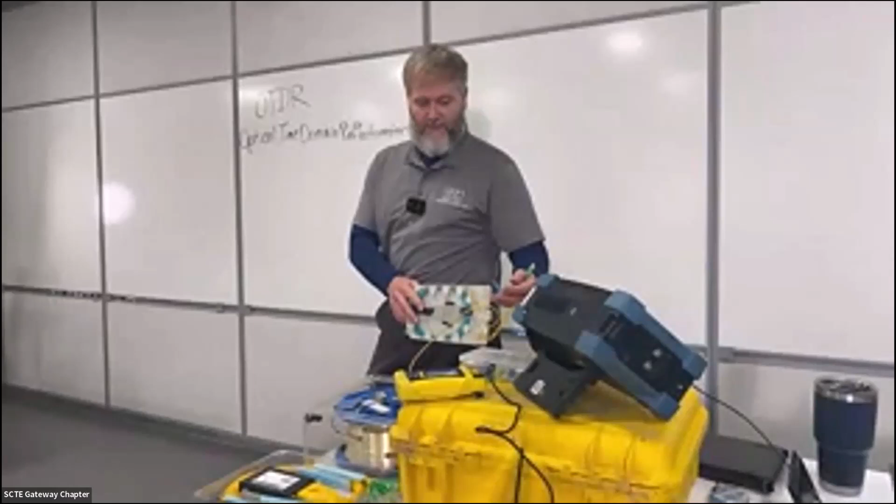Does it change the trace so it looks a little different to you and you're not able to analyze the anomalies on the fiber cable? We'll go through all of that. We're going to test through a bare fiber spool, about 7 kilometers of fiber. I'm using a homemade launch cable that I made myself. It has both APC ends and regular PC ends, so I can test multiple networks. We'll talk about why it's important to use a launch cable whenever testing networks.

On the way here, I was talking to some of my guys about some troubleshooting issues that they had in a hub. I will probably talk about what we deal with every day, which

Maybe, is that me? Oh, too. There you go. There's our first good one. That's it. Now we're through. All right. Broke that ice.

So anyways, I'm probably going to reach into my own toolbox of what we've been doing in Indiana. I'll give examples of some of the issues that we've experienced, and maybe you'll be able to relate: yeah, I've seen that, I've had that issue. We're going to talk about the basic level of the OTDR and try to understand what its purpose is. I'm not going to qualify myself any more than that. We'll just jump right into this material.

So for anyone that does not know, turn off your phones. I knew that was going to be me, and it was Bob. What about Bob? It's a good movie.

OTDR: a lot of guys don't even know what it stands for, how it works, or what it does. OTDR stands for Optical Time Domain Reflectometer. Most of you probably never knew that and really don't care. But what I do want to talk about is how it actually operates. It uses optical pulses of light. It averages the light that it sends out over time, and it's always checking reflection. That's its main job. OTDRs use what's known as back reflection, called backscattering.

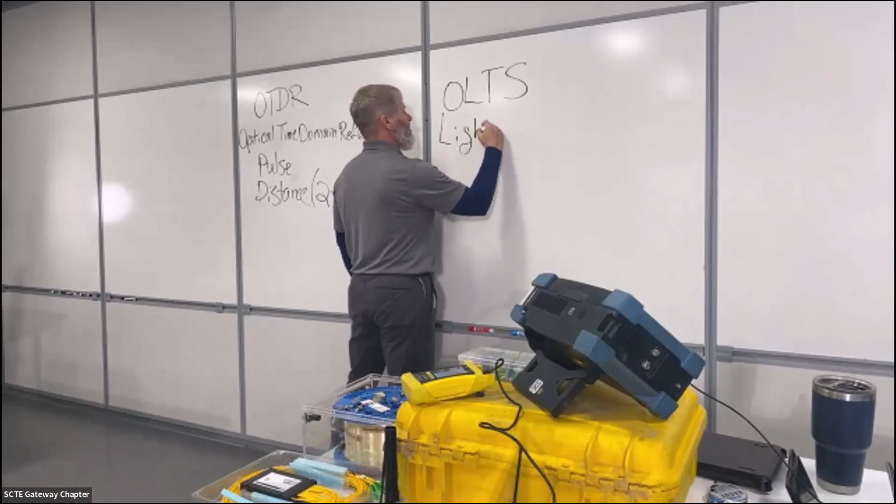Now, number one, if the OTDR only checks from one end of the cable, then it doesn't truly do what's known as an insertion loss test. So everyone that's on the live stream and everyone that's here in the room, a majority of you should know what an insertion loss test is. This is your optical loss test set. Do I get to go to the second board, did you say? Your OLTS. All right, your optical loss test set is your light source and your power meter.

Do you guys certify your networks by doing a bidirectional test from your central office down to your patch panels and your hubs? You should be, okay? When you go from the hub, which is known as the F2 side, the field side, you do the same test. You do an optical loss test set. That means that you have a source that is constantly sending a pulse of light down the fiber. You have a receiver that's receiving that signal. It is simulating how the user will operate when we plug them in to the equipment.

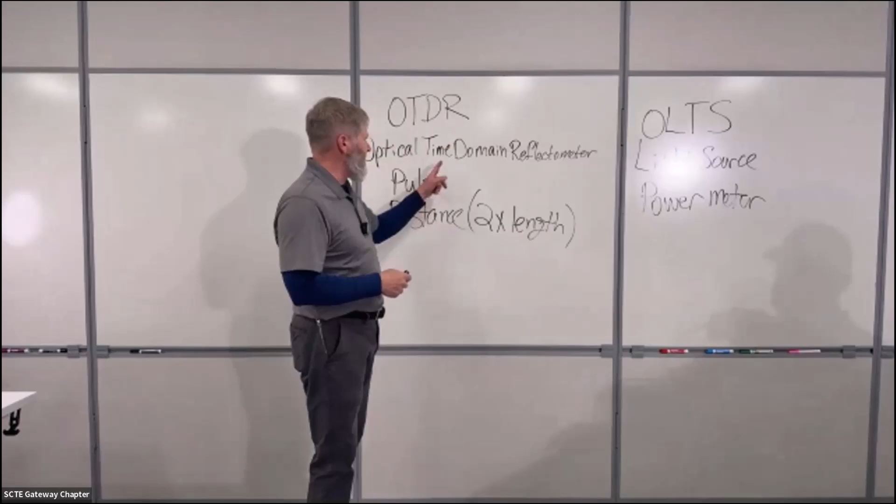The OTDR operates in a very different way. With the OTDR, it's single direction testing. As we said earlier, it operates like radar. It only shoots from one end of the cable. Therefore, there is nothing at the far end that's actually receiving any light. And here's why I like to stress this. You cannot use the OTDR to certify a network. There's a lot of companies that believe you can. And it's my opinion and FOA's opinion. I stick with policies and procedures, not really my opinion.

The use of the OTDR is to locate events, find a fault. It can tell me what's wrong with a splice. It's the only thing that can tell me individual splice losses. It can tell me back reflection. It can tell me how much reflection is happening across connections. It can tell me the length of the cable.

Now, I know a lot of guys will say, well, I have a machine. My OLTS tells me all of that and tells me the length of the cable. Well, that's great. But you just need to understand what the purpose of the OTDR is. So having said that, the way that we use the OTDR is basically just to try to find whatever our issues are on the cable.

Now, as we continue to go into doing the different settings changes, we'll also talk about how these work. They operate in different wavelengths. A lot of these units will do dual wavelengths because a lot of the systems that you operate in are going to operate in at least 2, maybe 3 separate wavelengths, what's known as wavelength division multiplexing.

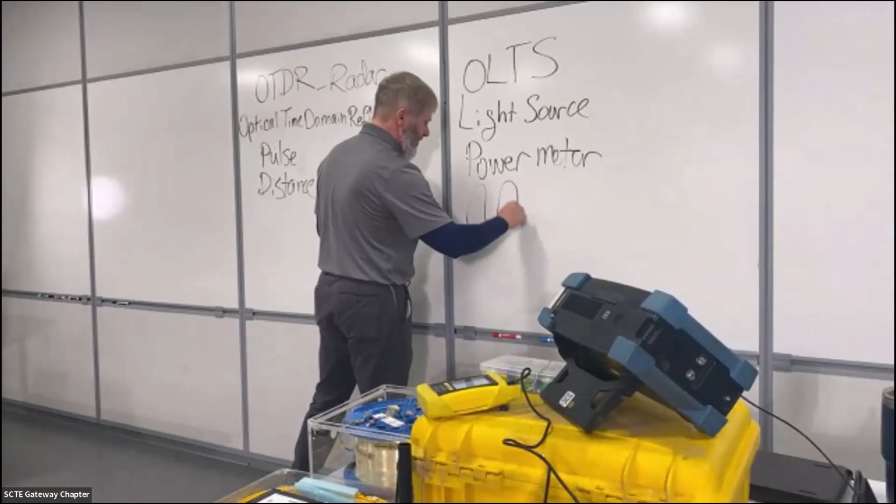It's the speed at which the light is traveling through material. Every wavelength is a different color. And it's very simple. Whenever we're referring to wavelength, we're literally talking about electric wave and magnetic wave traveling over distance in time. And so when they say wavelength, they're measuring the distance between those two waves. So let's say that's 1310.

Now, I don't want to go too deep into the weeds, but if you're going to measure it accurately, you've got to put it in a unit of measurement known as a nanometer. That's a billionth of a meter. That's how small the unit of measurement is for these wavelengths. So for most of our systems in here, we do multiple wavelengths. So you have to do wavelength testing as well.

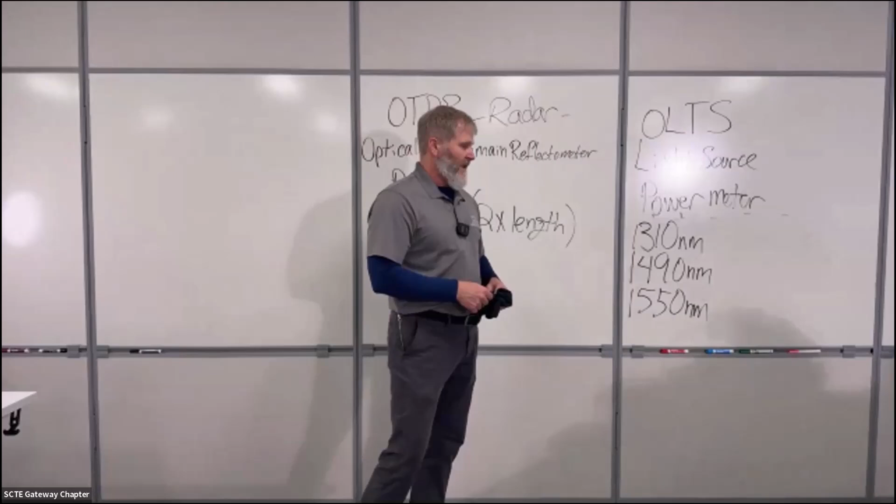1310 nanometers. You will see 1490 nanometers. You will see 1550 nanometers. And each one of those transmits different data simultaneously. Now, let me back up and say this. Why is it important to do bidirectional testing over your networks? Well, if you didn't know this, we use one single fiber to send multiple signals to each user passively.

This is a passive optical device. You guys work with PONs, passive optical networks. This device right here takes one single input.

Where can I display this? You want to come hold this for me there? My man. If you didn't know this, and once again, I'm just taking this very basic just so everyone is on the same page here. I got to hold this just right. This is pitiful. Listen, here's a plug for buying cheap equipment. You buy cheap Chinese stuff, you get what you pay for. If I'm in trouble for that, I apologize. There's got to be a disclaimer on the screen that says I don't know anything about it.

So this is a 1x32 splitter. The way that this works is it takes the individual signal. Are we able to see that light? Is that coming through at all? And it takes that signal and it splits it 32 ways through one single input. Are you seeing it? Is it blinking? Barely. It's coming on and off. All right. Thank you, brother.

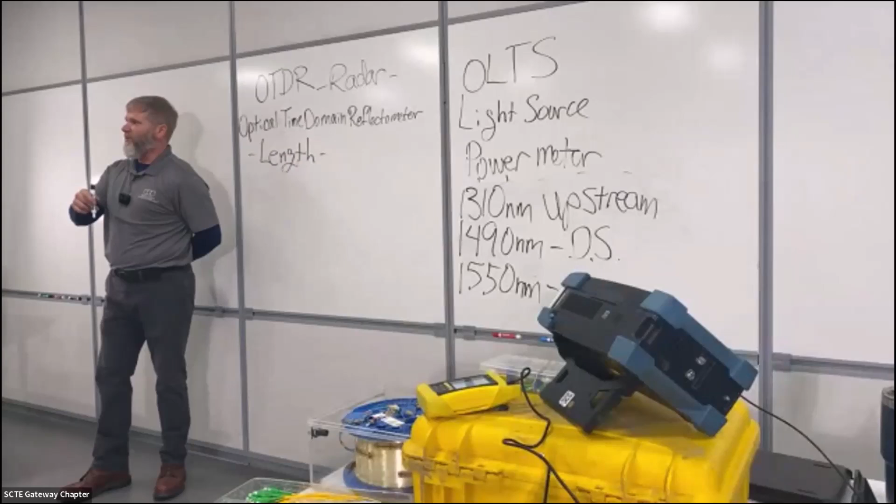So some of the main things that the OTDR does, besides changing the actual settings, what can it do? Well, number one, it can tell me the length of the cable. It can determine distance. When set with the proper settings, I can find out how long the cable actually is. I can determine where the break is. It can tell me actual splice loss. All right, and we'll actually see how you do splice loss here in a second. Determine actual individual splice losses. It can tell me back reflection.

My spelling is terrible, so please bear with me. It can actually do what's known as a fiber characterization. I'm probably going to spell this wrong.

That's wrong. Good. It's hard to spell in front of people. Try doing math in front of people. You're sitting here going, 1 plus 1... 1. So it's a joke. Come on, laugh. Come on, guys. Lighten up. You are not the one that's on the screen right now. Chill out.

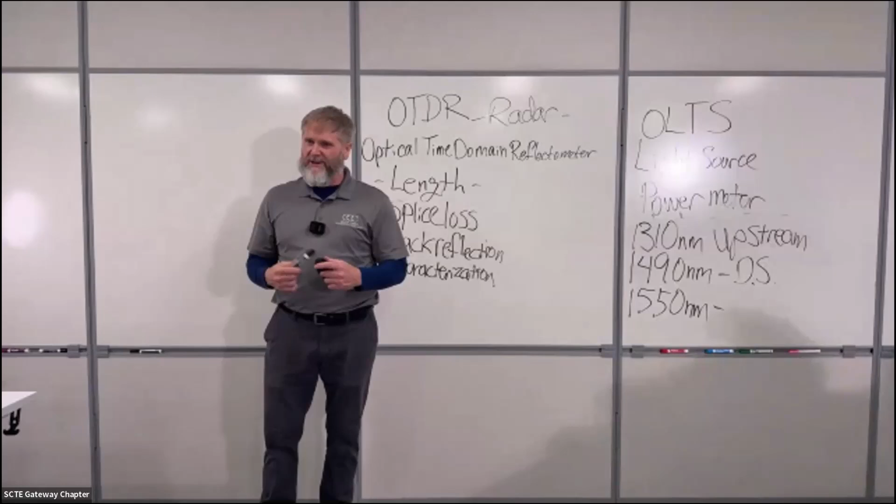The last thing that it can actually tell you is it's able to determine if there's any kind of dispersion on the cable. Now, I'm not going to get too deep into the weeds with that, but with single mode fiber, there's a couple of things that we do need to be worried about. Number one, we do have to worry about what's known as chromatic dispersion. The root word of chromatic is chromos. What does that mean? Color.

It just means that when you get a far enough distance away from your light source, the light slows in its speed. This is very simple. Just think about a parking lot. Last night, you were driving home from work, you were in the parking lot, you saw a light over in the corner of the parking lot, halogen light, whatever, LED bulb, and that light, as it slowly came to you, it changed in its speed, it changed in its color possibly, and by the time it got to you, it was less energy from where it started to where it got down to the end. So the same thing happens with light sources.

In some of the markets that I've worked in with Ervin in southern states, we actually reuse fiber over and over and over again. And we go up to 200,000 feet plus to get out to the rural area. So when we get out that far, the light might have a little bit of an issue just because it's dissipated. It's lost its energy over time. So it'll actually check for different types of dispersion. And then the last thing that the OTDR checks for is what's known as polarization mode dispersion.

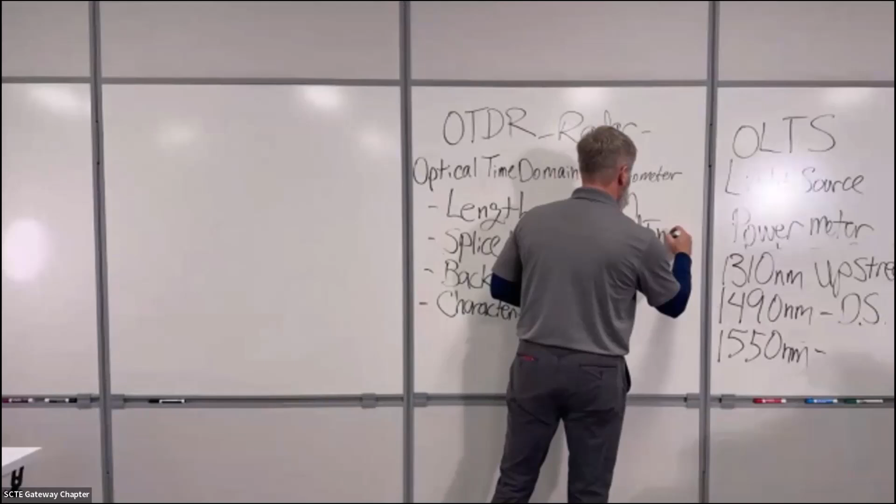So I always tell students that come through my class, I want you to be smarter than the average installer. One thing you need to know is single mode fiber is what's known as a stepped index fiber. That means it has one layer of cladding. And you guys should know this. If you don't know this yet, then I hate that for you. Whoever you're working with needs to explain these things to you so you know what you're dealing with. It's got one layer of cladding, one layer of core. Core is about 9 microns. It can be anywhere between 8 microns and 10 microns. Very small.

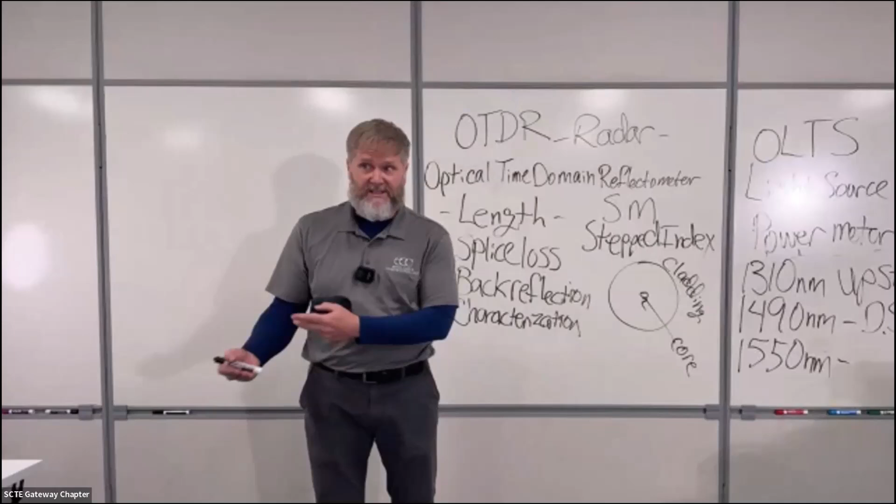Stepped index just means that there's only one layer of cladding and one layer of core, and the core is so small, so tiny, that the light only has one choice but to go straight. It goes in a straight line, hence the word single mode. Single mode fiber only carries one mode, so the light goes further. Imagine this. You can go up to 100 kilometers with single mode fiber before you actually have to amplify the signal.

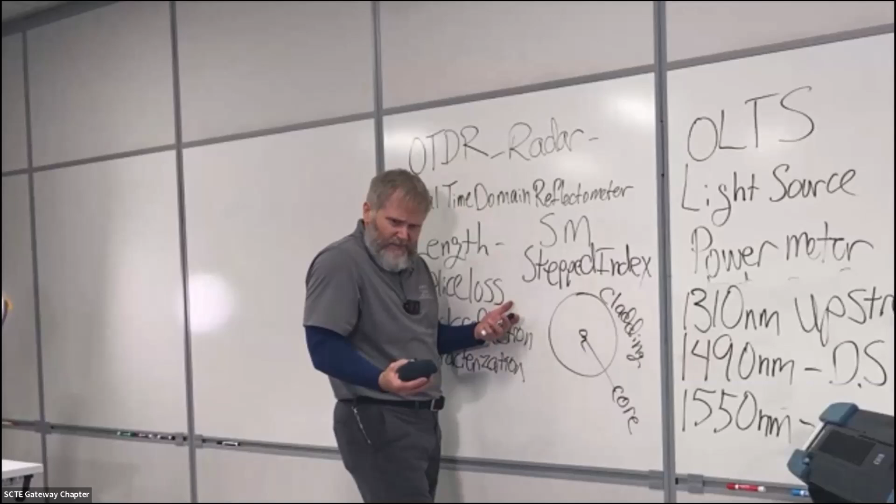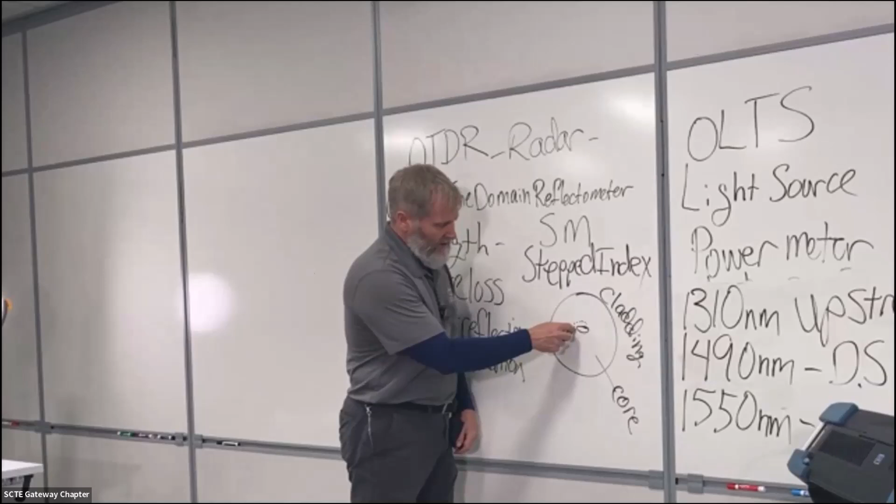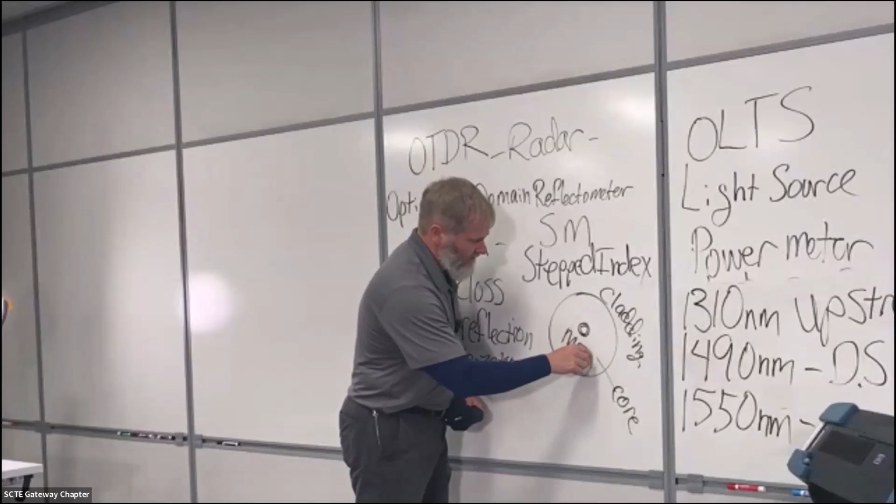So, it being a stepped index fiber, there's a couple of things that we need to worry about. And this will kind of blow your mind, but when fiber is produced, yes, the core needs to be absolutely perfect, but its concentricity may have changed. It may not always be a perfect sphere or circle. So the core may have changed. When the core does change, then it causes problems in the fiber. You'll see loss. So we actually have to worry about a little area all the way around the fiber known as the mode field diameter. So you've got your main core, and then you've got a little bit of area around the side. You have to worry about the mode field diameter.

So having said that, what's the reason that we worry about this? Well, the OTDR is the only piece of equipment that can test to prove if there's something wrong with that. That's when it gets into characterization. Now we're talking very long distances at this point. Now we're going 60 to 100 kilometers. We're traveling from city to city or whatever. So that's what is entailed in the characterization portion of the OTDR.

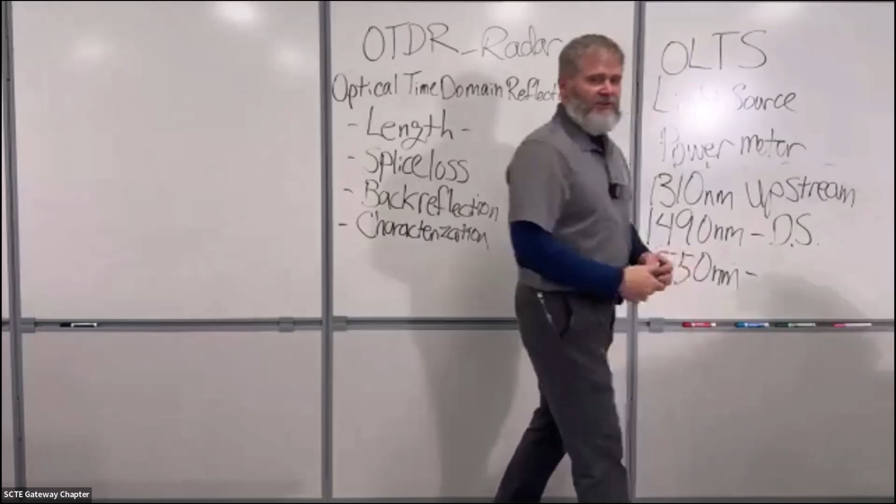Now, I started all of this to say the OTDR cannot certify a network, and a lot of people seem to believe that. It cannot do that. Its main objective, as I said, is to find the faults and the issues. So we're going to go ahead and jump in to see if we can find a couple of faults and issues here, and then go through and do a few settings changes.

All right, so my screen is being shared at this point. Good. Thank you, Jake. My driver, Captain, my captain.

I don't know. Probably, yeah, it'd just be easier. It's just rude of me to say, hey, do this. That's very rude.

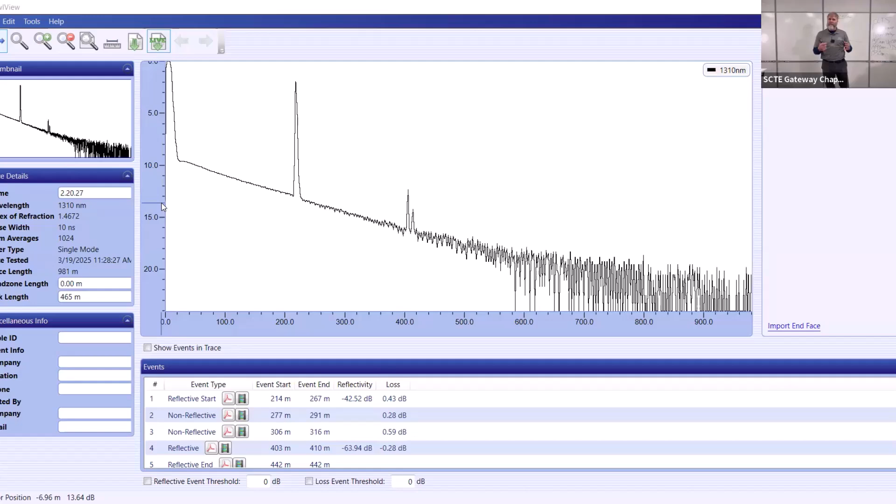Well, you worked in fiber long enough, you do not want to mess with live fiber, okay? You don't go in and open up a case in the central office unless you know what you're doing. And so they went in and were actually trying to check to see where the issues were. And one of the tools that we're able to use is we can go in and find the fiber pairs that we want to work with. We can put a little micro bend. We can determine if that's actually where the issue is. So it's a very handy tool. So we use live fiber mode quite often.

We'll go in and change the pulse width. We will leave the wavelength the same. I will change the number of averages, and then I will set the actual distance of the cable. And we'll see if we can see this whole network. Now, like I told you, this is 7 kilometers of fiber. It's 21,000 feet. So right now, am I really seeing a full 21,000 feet?

Well, let's just go straight to the trace. We're going to our sample trace here that we're looking at. And as you can see, we have whatever amount of loss we see on the left-hand side, and then we have our distance, and then we see a reflective peak at what, 210 or 207, 214. You see this? You see all these down here? You see these events? There's my reflective events. So there's a connection there.

It shows reflection. We're going to get into what's good and bad when it comes down to reflection. It's an interesting animal. With reflection, the higher the negative value, the less reflection.

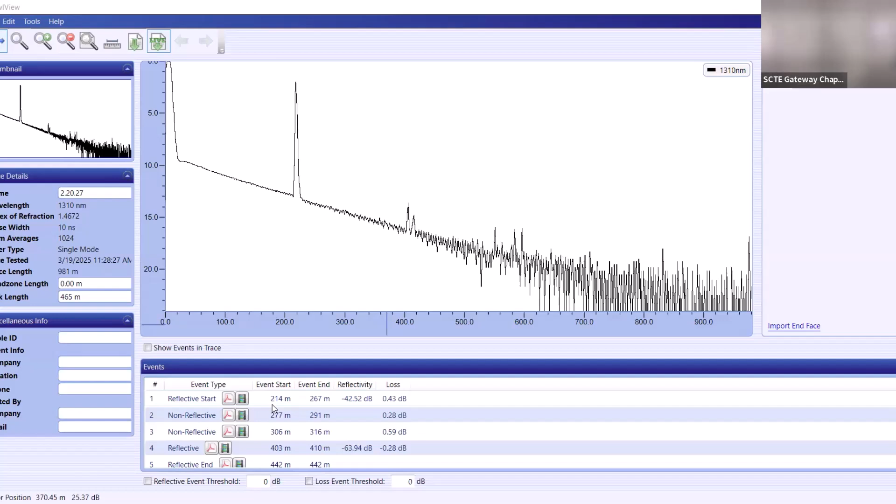The lower the negative value, the closer you get to 0, you have more reflection. So generally speaking, when we see reflection, we want to see a -40 or lower, which in your mind kind of throws you off because loss is inverse to that. So we want to see a reflective peak that is fairly low, and it is saying the reflectivity is -42.52, fairly decent. Says the loss is 0.43, fairly decent losses there.

Goes into a non-reflective section at 277, another non-reflective at 306. Shows a reflective peak at 400, and then says reflective end at 442. So are we seeing 21,000 feet? No, we are not. I'm going to have to change some settings. Now, I personally do this to kind of teach. I'm sorry that I'm going to have to stop this. We're going to restart it, but I'll have to go in and make the settings changes.

Now, what I'm going to do is run this in full auto. In full auto, you'll see what you guys would normally see when you're out in the field. So I'm going to have to stop this application. Actually, I'll just stop it here. In full auto, I'm going to have to do the trace, save the results, download it. It's the only issue here, so bear with me as we do this each time. And then we're going to talk about the different components.

Now, are you guys using launch cables? Good answer. What is the minimum length of launch cable that you're using? 1,600 feet? Very good. So, in theory, you need around 700 to 1,000 feet for the pulse of light to actually go through a section of fiber and calm down. A launch cable is known as a pulse suppressor.

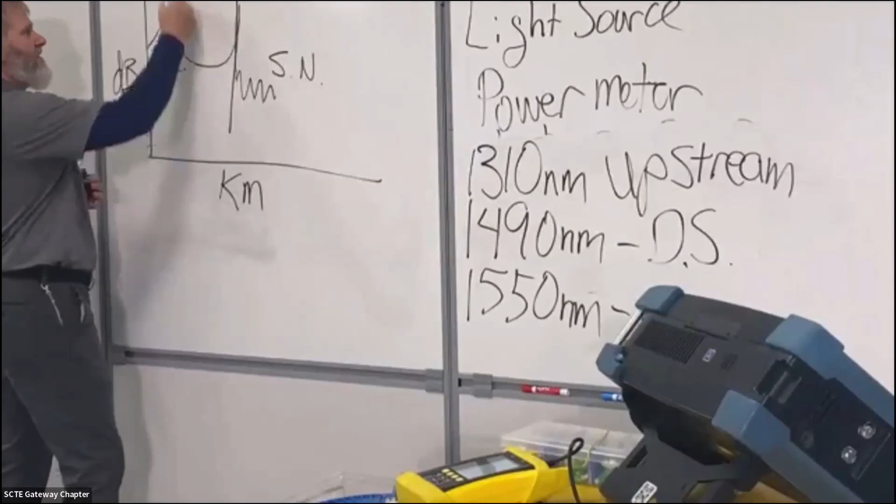But if we're trying to check the length of our launch cable, it'd go down and then you'd see another reflective peak and then it would drop off into what we call software noise world. If you want to measure the length of your launch cable, you put a cursor on one side, another cursor over here, and you get a distance between these two. Then you can plug that into your OTDR.

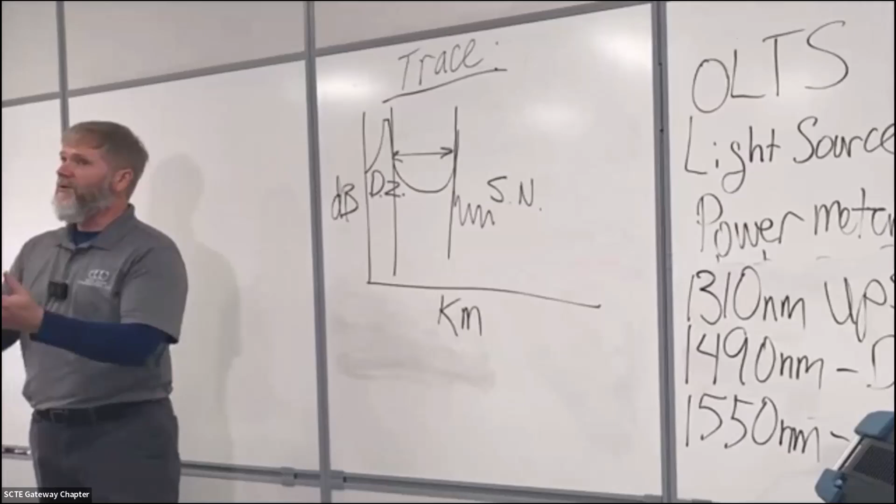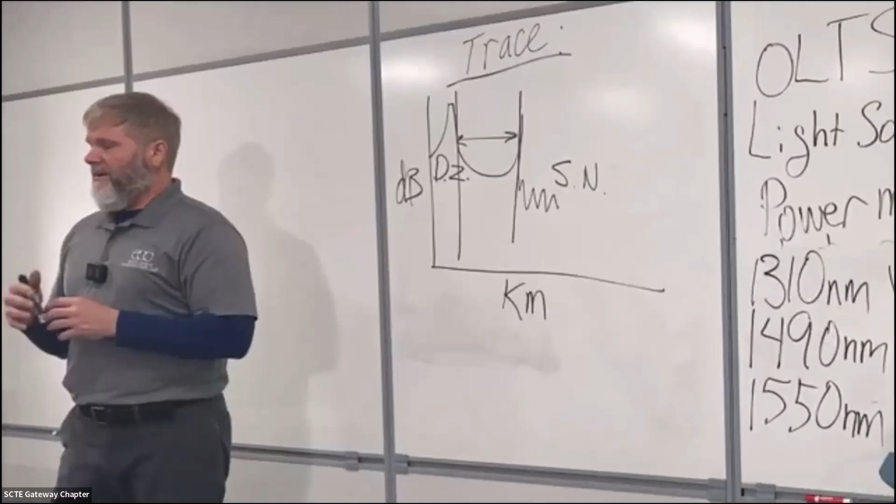Other OTDRs will allow you to make a settings change that says not disconnect, but discount, or it bypasses. It looks at the first connection and says, don't even worry about the first connection, check the next connection. So the next connection will be your next connection in from the launch, because here's my first connector, then I have my second connector. Make sense? So it's very important to set your OTDR launch cable length properly, so that you can determine what your network is.

Now, the next thing that's important about the launch cable, be honest, who uses a receive cable? It's just a glorified launch cable. Do you put a launch cable on the far end? How do you know the loss at the far end? What is that?

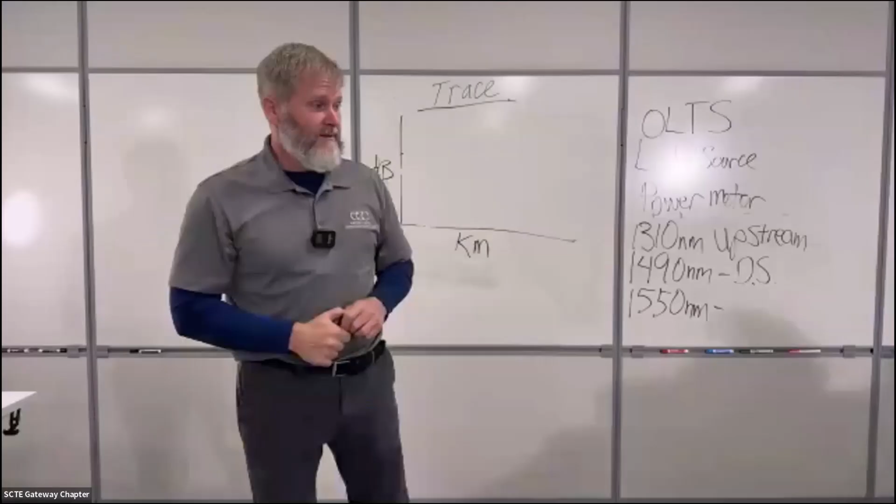Do you put a receive cable on? No, you do not. How do you know the far end connection? How do you know the loss across the far end connection? How can you? When the light gets to the far end connection, it has to go into another connector for you to actually see the loss. So if you don't put on a receive cable, you really don't know the far end connection's losses. Does that make sense? Are you tracking with me?

Now, here's another reason why it's nice to use a known launch and receive cable. You ever get into when you're testing networks and you're having some major issues trying to find out the actual length of your segment? Well, wouldn't it be nice to have a known good distance at the front and at the end? And then all you got to do is just subtract those two distances and you know everything in between is the actual cable. Why is that important when I'm trying to find a break?

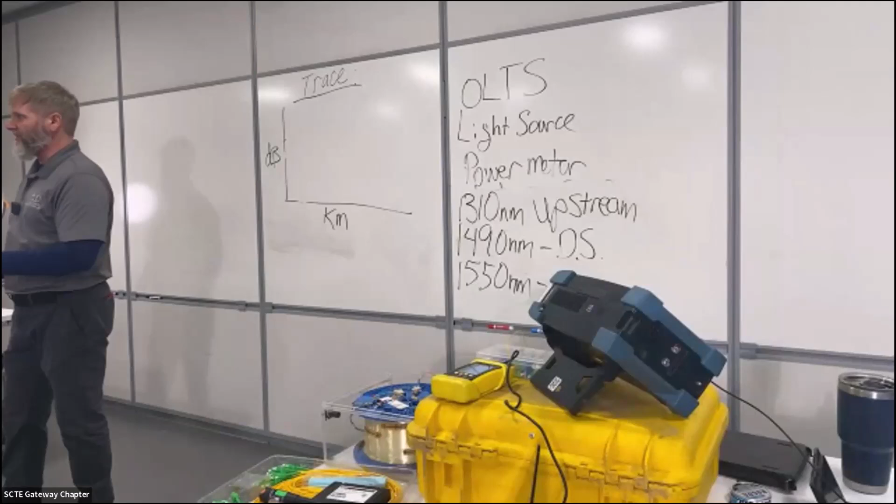Now, I always go back into my own toolbox. We've had quite a few fiber breaks, what we call backhoe fade. All right, we've had guys set anchors. You ever had anybody set an anchor? Do a down guy, punch right through your pipe, screw your fiber right to the ground. You ever had that happen? I mean, surely you have. It's happened to me. It's happened to you.

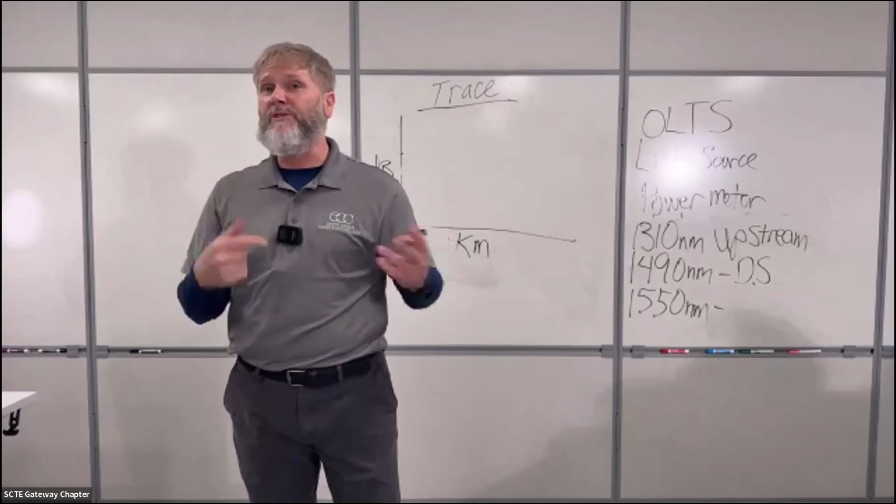All right. We had that happen on a 288 fiber in a city in Indiana, and we're trying to find out where the issue is. So instead of using a launch and a receive cable, what we did at that point in time is we used two OTDRs. I went from one end and shot the far end back toward the hub. My technician went to the hub and shot from the head end back toward the far end. We were able to get a general location of where the break was. And lo and behold, doing that technique, we walked right out there and looked at the pole and saw a brand new down guy.

And do you think they told us they did it? No. Do you know what they did? Can I tell you a secret? Don't tell anybody. So they dug a hole and they used a sawzall and they cut off the top of the anchor, the rod. This is how smart these guys were. They just left that in the hole and the sawzall blade. And then they just moved over and set another anchor right next to it. And when we asked them, do you guys know anything about it? No. Yeah.

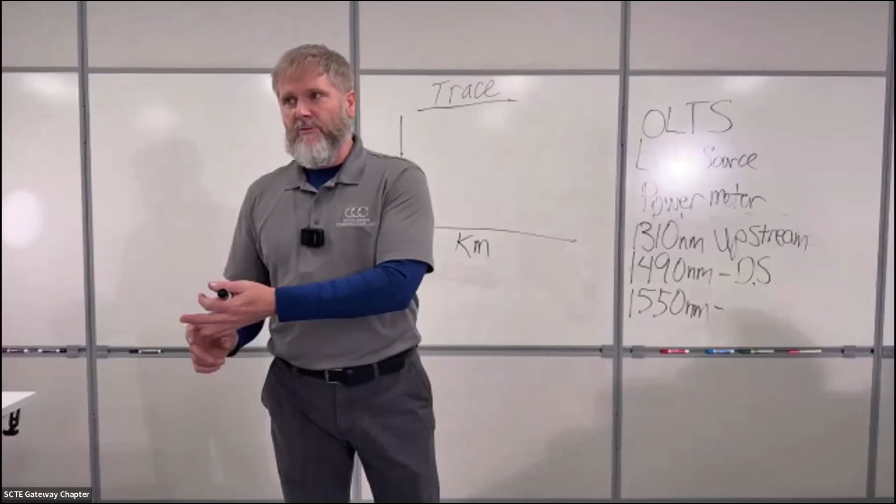So, main objective and reason for this story: if you have a known good launch cable length and a known good receive cable length, it helps you to determine the problems a lot faster. All right. If you can't do that, then you obviously use two machines, shoot from both ends, whatever. So we're going to go through and check all of that.

How? Uh-oh, am I still doing something wrong? You're driving. Drive for me, brother. So, how do you actually analyze a trace? Go ahead. I'm waiting on you. Oh, I see what I got to do there.

Thank you. How do you analyze a trace? Right? You shot light across the fiber, trying to determine the length, trying to determine your problems. You're trying to find out where your issues are. What do you do? Use cursors, right? Markers. Left, right, 1, 2, A, B. In my world, mine are red and green. I am able to determine distance and loss just by moving these cursors.

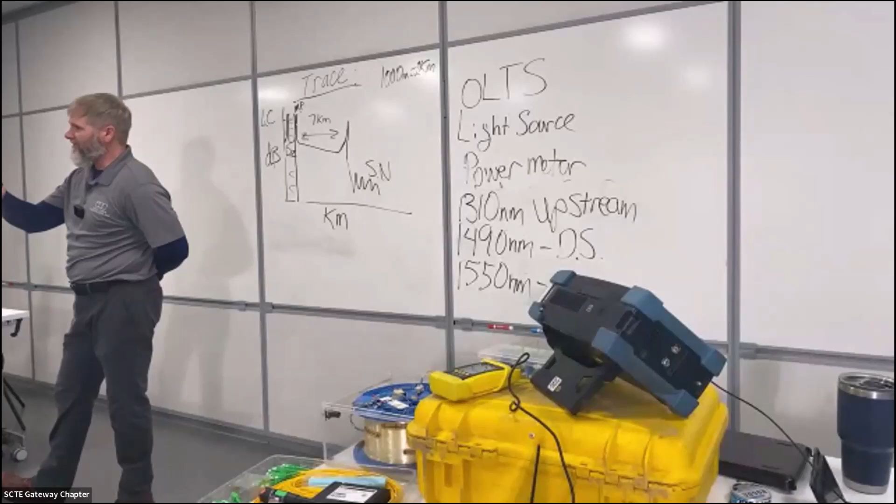I haven't seen a hub yet that was over 15,000 feet or so from a central office. Most of our feeders are fairly short, 20,000 at the most. I don't know what yours are. But if you have negative light at your hub, then you're already going to affect the input to that splitter, which is going to give you less light to the splitter.

Okay? Go to the example that I saw this summer. We were sending a positive value of light from the central office. It was leaving out of the central office about a +3. By the time it got all the way down to the far end and we plugged into the actual feed fibers from the F1 side, we were like at a -5 or something.

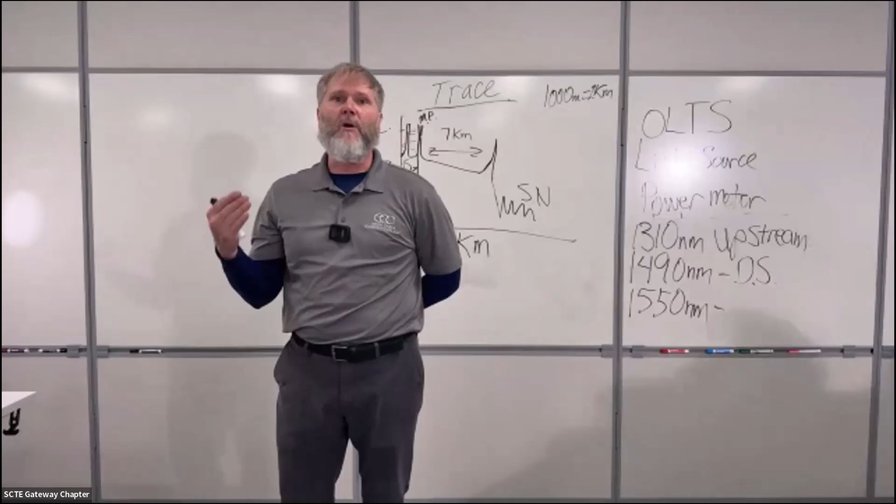Now, the 1x32 splitters, and all this information, everything that I'm telling you, all comes from a standard. There's a certain standard, TIA 568, C.3, there's a D.0. There's a lot of different standards out there. When I mean a lot of different standards, I mean a lot of different drafts or versions of standards, but most of the numbers, they're basically all the same.

And when you go through this 32 splitter, you generally lose anywhere between 10 to 15 dB of loss. So if you already started at a negative value, then you're going into a splitter that's already going to be negative, then it gives you less light to your customer. The hub we were testing started at a negative value.

Once it got all the way out to the customer, we were down past a negative 21, 22 at the house. There was not enough light for the actual photodiode on the network interface device on the house there to actually light up the house. What was the problem? We determined the issue ended up being that we had dirty connectors in the field.

Now, who scopes these connectors? Who takes an actual scope and looks at them? Raise your hand. Anybody do that? I do. I do. Anybody in here do? Probably not.

It's okay. I'm not trying to call you out. Are they going to get in trouble for this? They're getting in trouble. Yeah. Boom. I need you to sign a document later that you test all this information. Legal affidavit.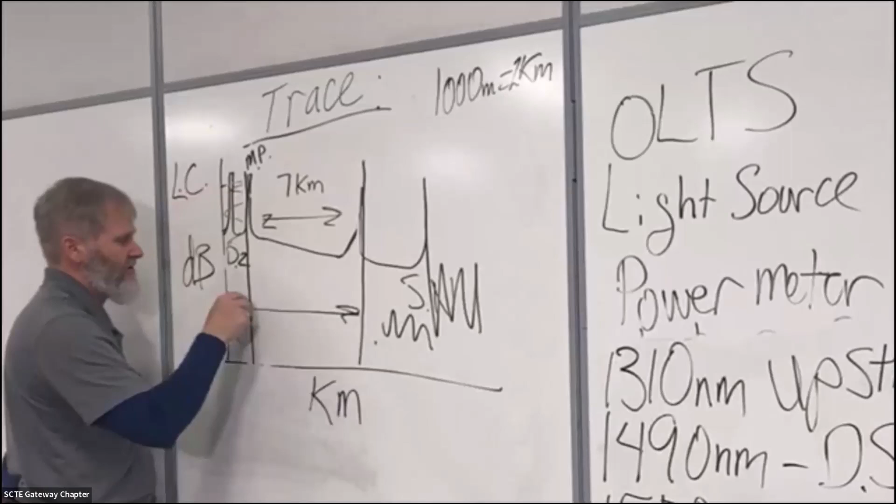It's very important. All right, because at the end of the day, if we don't get enough light to the customer, then obviously we're not doing any good. Now, for today, I'm going to be able to connect this to a receive cable, and then we'll do a shot across this again. And we're going to prove this and see that process. Now a little homemade number here.

All right, we're going to go one more time. So we're going to go in. I'm once again not changing any settings yet. I'm going to change the settings here in a minute. But for now, I just want to show you running this in full auto.

Am I still sharing at this point, or do I have to go back? Okay, that's cool. I think I understand now. Okay, and then what do I do? Share screen. Got it. Okay, and I am sharing. Very good. Okay.

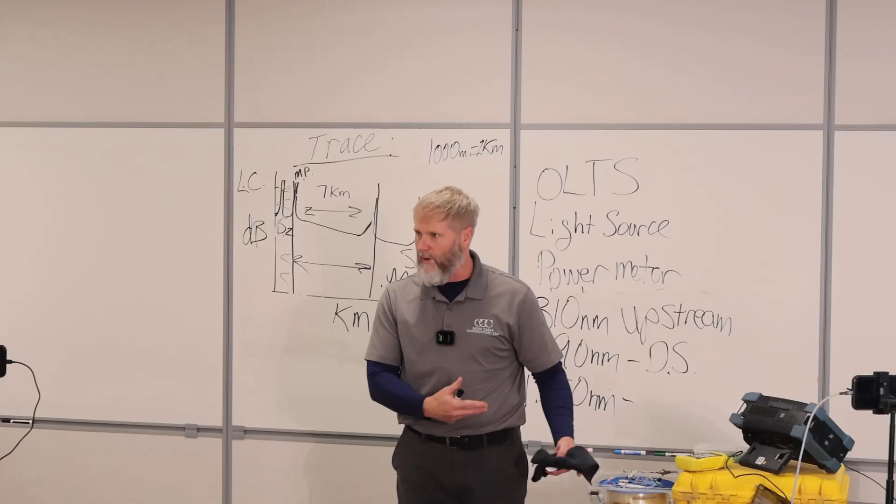All right, so let's get back into this. Now, when we just finished, I was going to show you with the OTDR, we were going to look at how the trace looked different when I put on a receive cable. I have just put on a receive cable. Are we seeing this? We're good, sharing? I can't see past the last connector. I'm not going to sit here and waste your time to try to describe why I can't see past this. I don't really know right now, okay? And now is not the time to try to troubleshoot this right in front of me.

But having said that, what we would have expected to have seen, let's close that door if you don't mind. I don't want to see anybody.

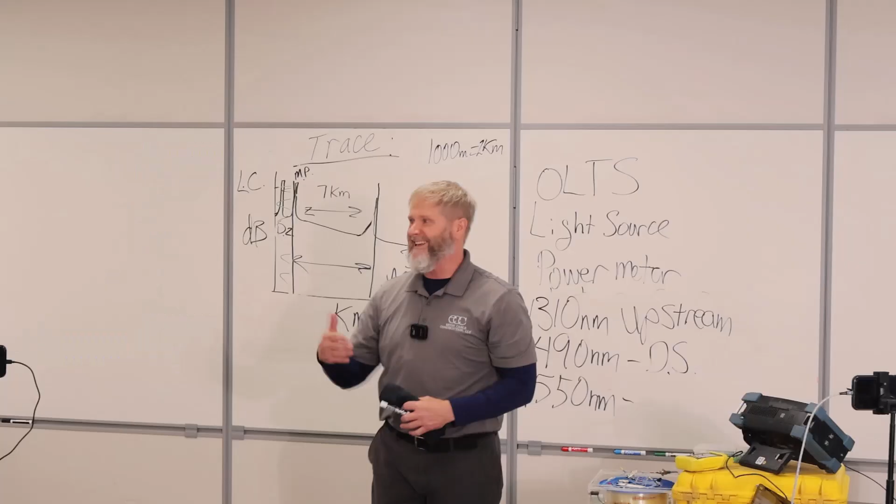Having said that, what I would have expected to have seen here is another blip like this very first connection here. And I would have seen another one down there, and it would give me a little bit of distance to get out of that last connector to go into another piece of fiber so I could check the far end connector. Now I'm telling you guys procedures. I'm not telling you this is my opinion or what I feel like you should do. This is just what should be done if you really want to know the far end connector.

Now, I will also have guys who'll ask me this next question. They'll say, well, all right, we're never going to go out and put on a receive cable. We're all from the world of production. Let's just be honest. Okay. The job is to light up the hub. We want the customers on as quickly as possible. If the connections aren't bad on the far end, do we really need to worry about it? No, I guess you don't. Okay. You can wait until there's actually a problem and then address the problem then.

I'm not going to say that it's accepted practice, but it is kind of how it works, because generally speaking, when you guys go out and you're using nodes, nodes go to a hub, right? I don't know your network, but right. So generally speaking, these hubs are all pre-made at the factory. So when you get them, they should have already been checked, QC'd. So all the caps should be on them. So in theory, there should be no dirt or dust on them.

So one thing that I was really a stickler for and came very close to wanting to just fire people was if I went to a cabinet that you just tested and you pulled all the blanks out so you could test, because it was just easier to pull them all out and test, and you left them out, and I found that cabinet with open connections, I wanted to visit with you privately.

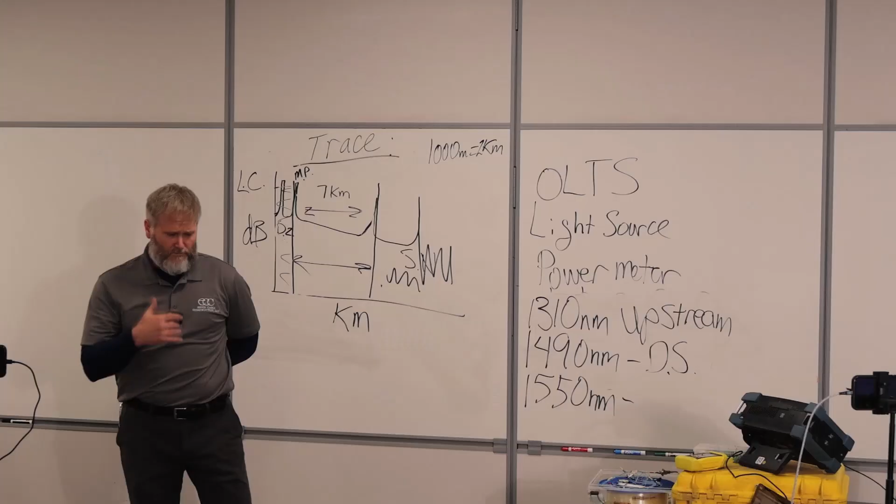So that's it. Now that we've actually done a full auto trace, we see what the trace looks like. Let's talk a little bit about theory and how light works. Light traveling through fiber is compared to light inside a vacuum. What's a vacuum? Space. Light traveling in space travels about 300,000 kilometers per second, or about 186,000 miles per second.

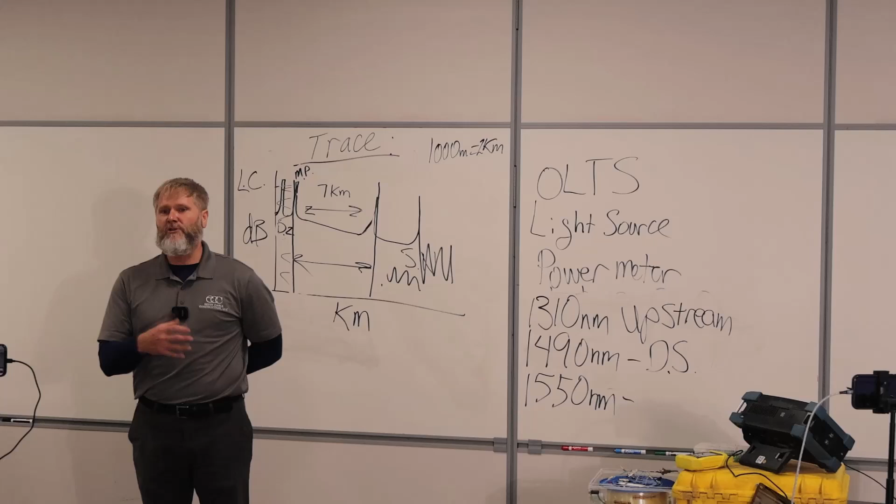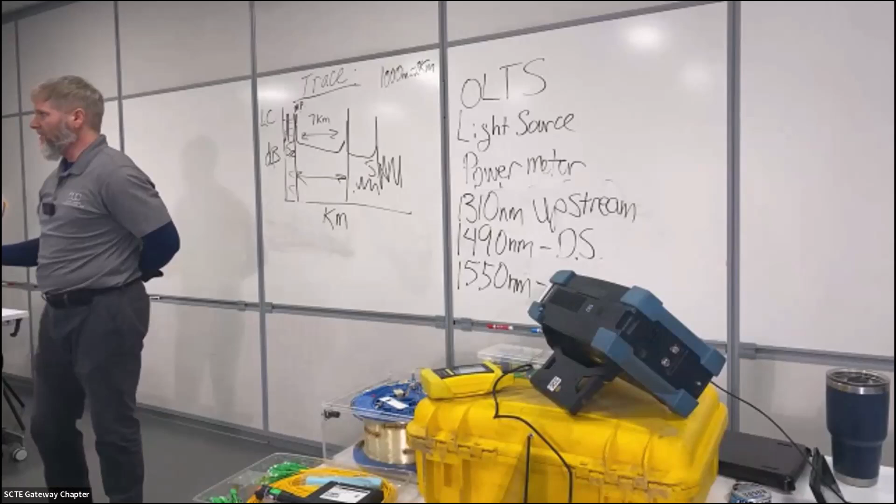Now, light in fiber travels at about 2/3 of that speed, so about 200,000 kilometers per second. That's why whenever we send light on this side of the earth, it gets to the opposite side of the earth just that quick. So when we're testing our fiber networks, we're always testing a really short distance. This is another reason why you need a launch cable, because you'll never see the very first events on your network. It's impossible.

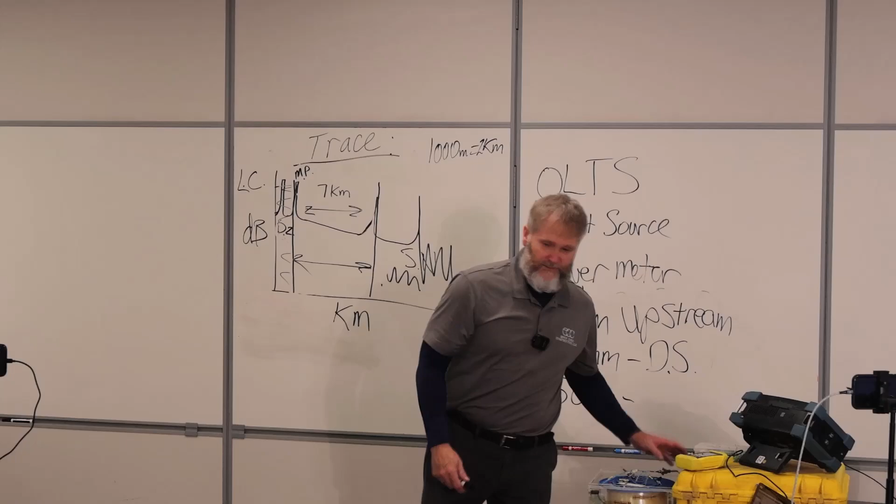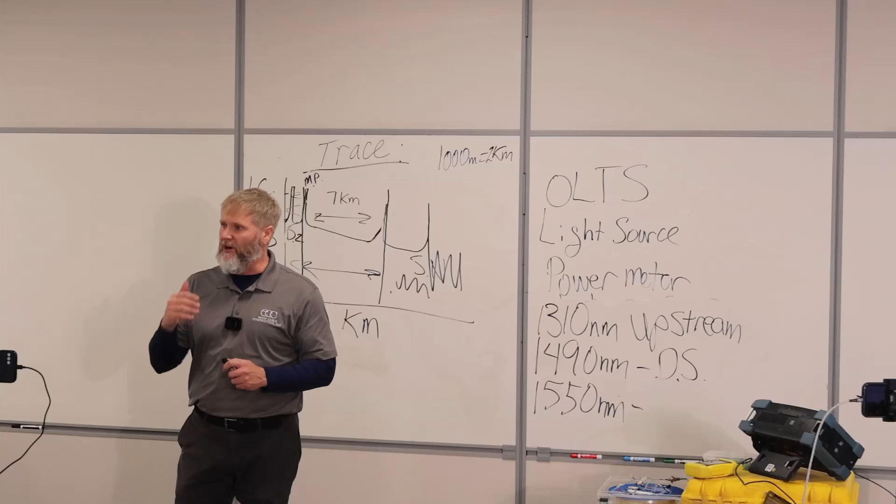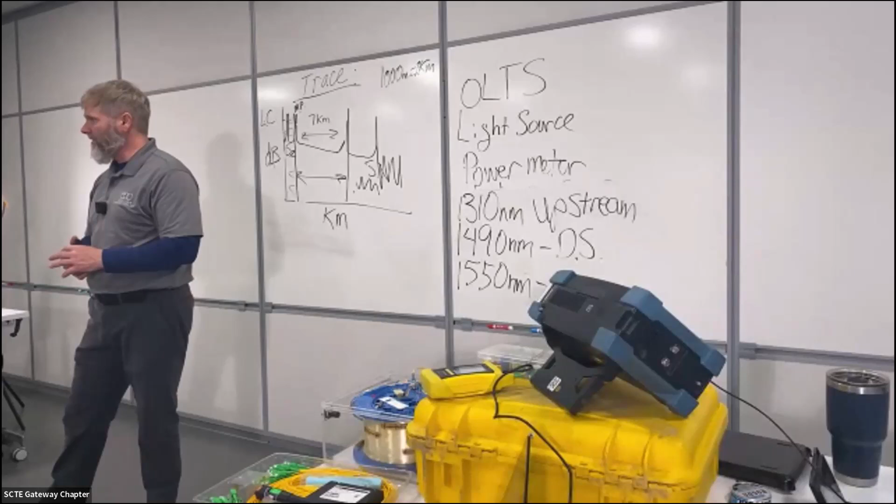Now, this brings me to what I tell guys when they're testing in the central offices at the head end. Going back to the example I had this week, if you're trying to prove that there is loss within 1,000 feet of the machine, you've got to use the launch cable. They had a loss at about 140 feet. They didn't use a launch cable like I told them, so their trick was they went to the far end, shot it backwards and found out it was inside the CO. But no matter what, don't forget your launch cable.

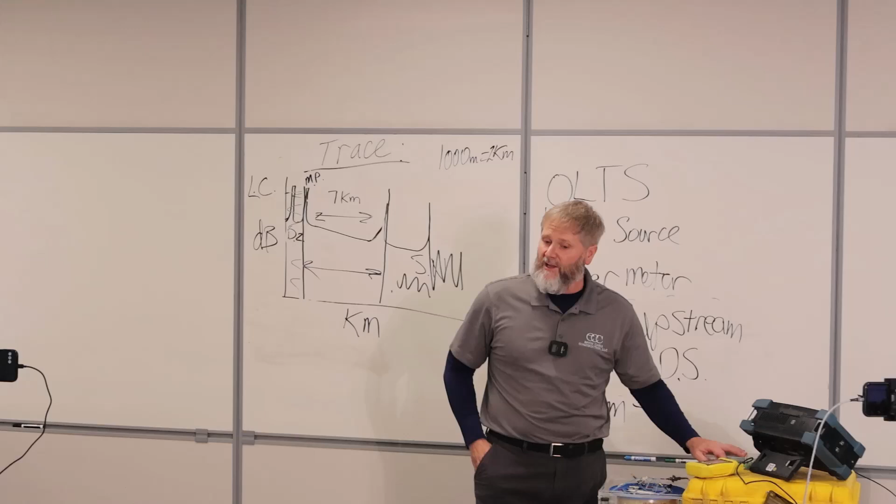It needs to be at least 700 feet, 700 to 1,000 feet. Most of them are around 100 meters, 150 and so forth. I do not know what standards you guys use up here, but some companies will require up to 3,000 feet to accept your OTDR test results. So you need to pay attention to that as well.

One thing I do talk about, this has nothing to do with testing, but it is something you should pay attention to. Once again, this is a procedure, not an opinion, but these machines do need to be calibrated. I want to say it, and it's not going to be good, but they should be calibrated annually.

That's not really feasible sometimes. It's very expensive. You spend hundreds of dollars to ship the machines off. They're out of service for a couple of months. Then you get them back with a new calibration date. So you need to pay attention to that. If no one's arguing with you over your test results, knowing that your machine hasn't been calibrated since 2016, 2017, then don't worry about it.

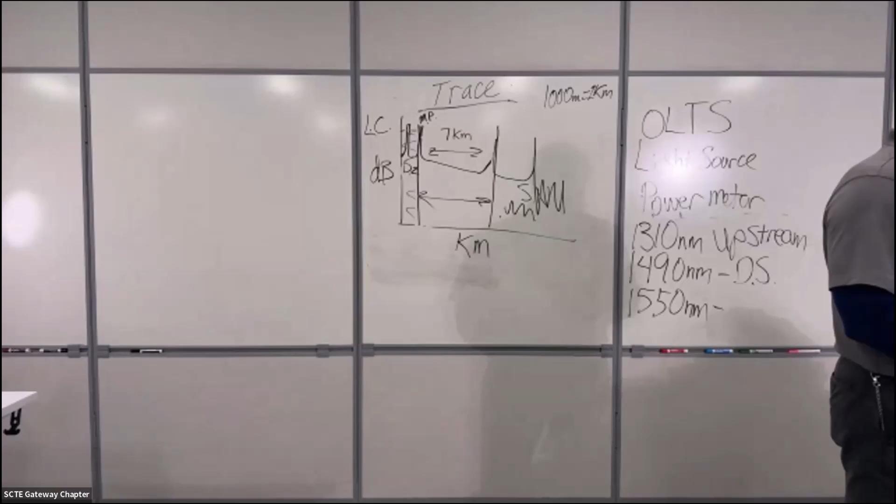Doesn't matter. Okay? Some companies do worry about that. So think about that as well. Now, we've made all these settings changes, but now I'm going to back it up. And unfortunately, we never got to see the actual unit where I could make the changes live.

We're probably going to take another break. How long of a break would we end up taking? The next section. Okay, we may try to revisit this so that you can actually see.

But basically, all that's going to change here as I start making these settings changes is the trace is just going to look a little bit different. So let's talk about the pulse width. I'm going to go ahead and just write this on the board, and then we'll start here. We're going to go back to the world of theory. We'll come back to this here in just a second. Now, pulse widths start down to 1 meter. This one does 1 meter all the way up to 1,000 meters.

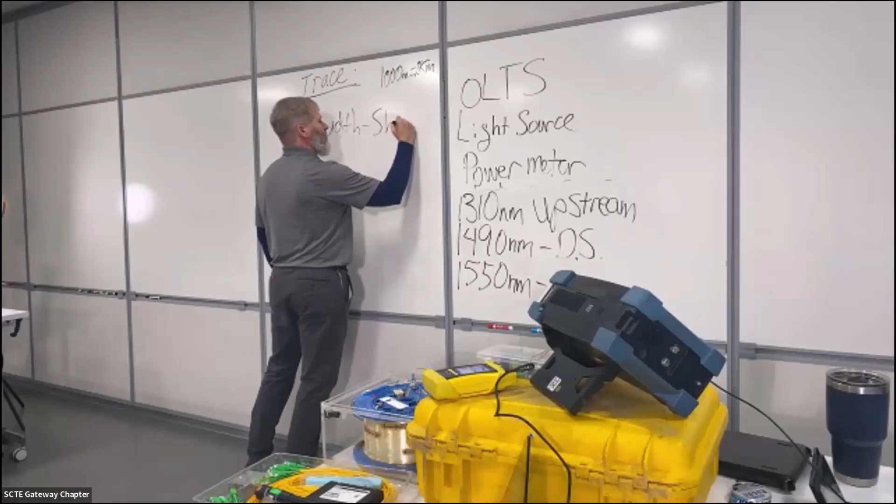When you think of a pulse width, it is a literal physical distance. It means that you left the flashlight on for a certain amount of time and it turned into a meter or 2 meters or 3 meters or so forth. So pulse widths, whenever you start out with a short pulse width, let's say 1 meter, it will actually pick up quite a bit of anomalies on the fiber. It'll see a little bit of everything. But the shorter the pulse width, the less energy. Doesn't go as far.

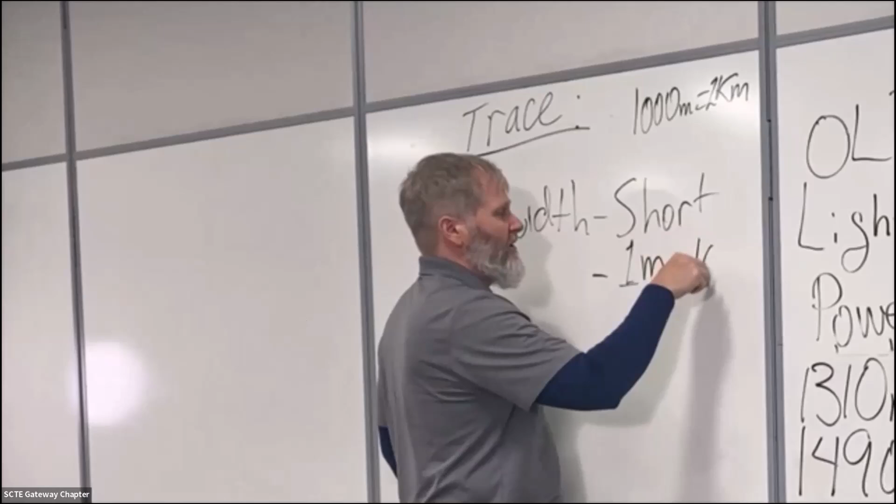Now, the EXFOs have an intelligent feature in them that when you set the actual distance of the cable that you're testing, it changes the pulse width automatically. Because it knows when you're going to test a very long distance cable, you need to change the pulse width. So for the most part, you don't really make those changes. So if I'm going to test a short network, and I'm going to claim definitely less than 7 kilometers, we're going to do 1 meter. We can do all the way up to maybe 100 meters for this 7-kilometer link, and it'll probably be just about the right pulse width.

Earlier, I think, well, it says it right now. It says 500 nanoseconds. There's an equation that you can use that'll actually tell you how much the pulse width needs to be based off the distance of the cable. I don't know it by heart. I don't have it memorized, but there is a chart you can use, and it's like every nanosecond is a meter or something. Nobody's going to go that deep into the weeds on that, but just know shorter networks, shorter distances use shorter test pulses. The shorter the test pulse, the less energy, doesn't go as far.

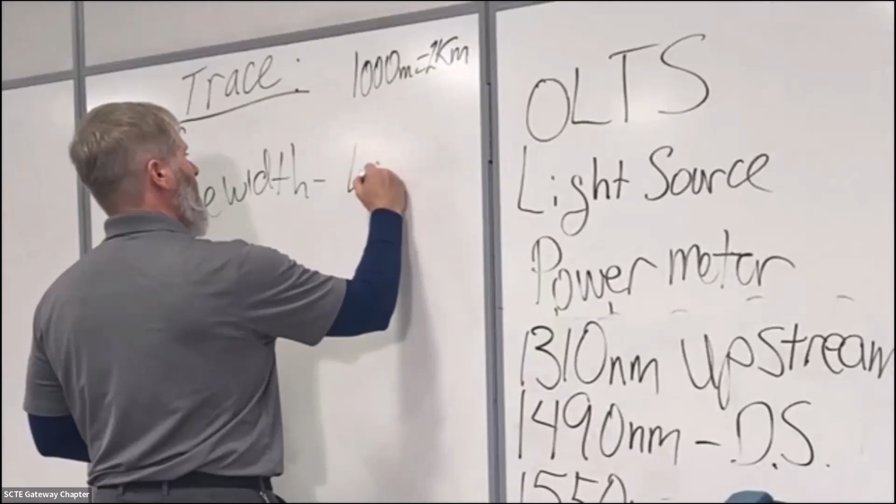So as you know that the network is longer than a certain distance, and I can't say exactly what distance, if we were to dial that machine in, I would believe anywhere past 7 kilometers or so, it's pretty much going to say, hey, you need a wider test pulse. It needs to go further. So if we go with an actual longer pulse width, let's say we're doing 500 meters or more, we go to the long pulse width. Then at that point, we're able to actually have more energy. We'll get further distances. But what's going to happen in that actual trace itself?

Like, look at, are we still sharing the screen? What happened? Do I need to go back and, yeah, hit me, boss. So when we get this shared, my apologies there, gentlemen. I don't mean to make you do that. Are we sharing now? Very good.

I could have dialed that down a little bit. Would have looked a little better, possibly. Now, look, we're talking troubleshooting right now. So I know the next thing guys say is, I don't ever really worry about that. I just want to know how long it is, and I want to find the bad fusion splice. I want to know where the fiber's broken. I want to find a micro bend. I know that. I understand that. I'm just trying to help you so you'll know kind of what you're looking at.

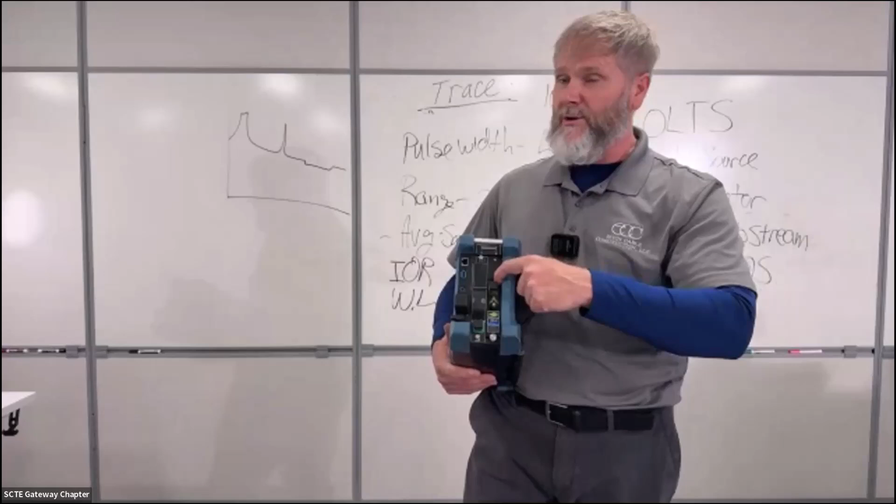Because they only take APC connections. You cannot use, and it tells you right there.

Yeah. I'm sorry, I keep moving. Let me get back to where I'm not moving.

Now, let me tell you something. Never plug in an APC to a PC connection. That can damage it. All right. Now let me give you some technical information. This is not even on OTDR, but it's something I do want you to know. You need to know this. What is an APC? Does anyone know what it stands for?

Angled physical contact connector. Every connector we use is a physical contact connector. These are PC connections, physical contact. These right here are actually known as UPC, ultra physical contact. Just means that they have a dome top to them. All of our connectors do, they're not flat. Anyone tells you they're flat does not understand how fiber works.

You got flat, you put another piece of flat on the other side, you got two pieces of glass sticking together. What happens? Reflection. So the connectors that we use have a dome top to them. There's a reason for that. You understand geometry, shapes. When you make a convex surface and you put a dome top, as the light comes down to the end of this connector right here, all that light gets focused to the center, to what's known as the axis, and it comes straight out of the center.

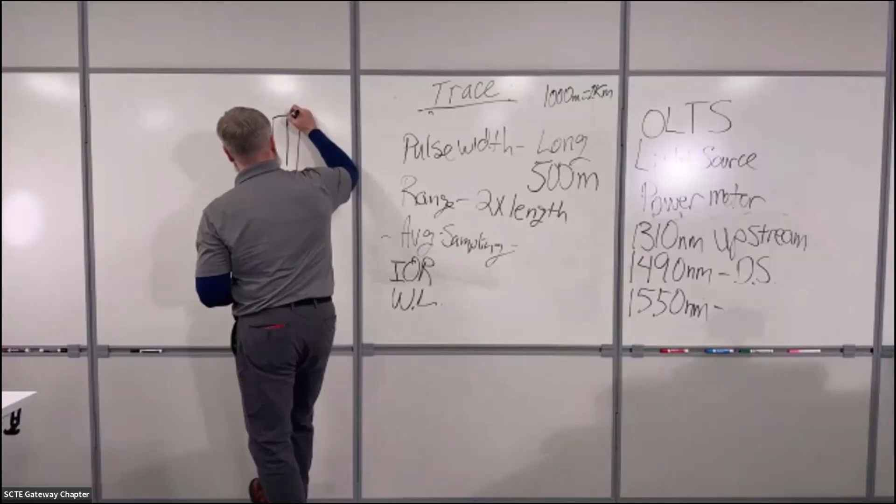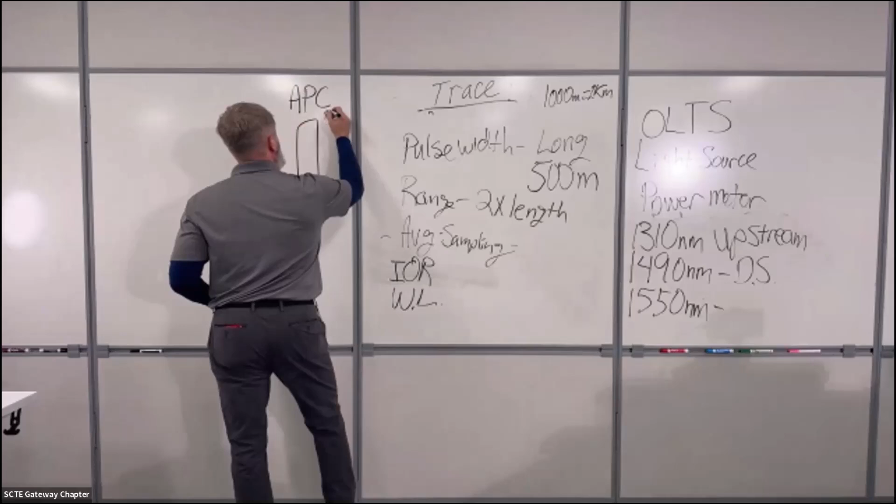If you make this a flat top, then all that light comes down here and starts bouncing off the end face of the glass, and then has a problem connecting over to the other side. That's where reflection happens. So in fiber to the home, it's a very big deal to have back reflection. So we used what's known as an angled physical contact connector. Has a little 8-degree angle across the top of the connector. They're usually green.

So as light travels down this fiber, when it gets down to this opposite end right here and it bounces off of this, where is the light going now? Since we've changed the angle of the glass, it goes back into the connector. It doesn't go back to the source. It minimizes back reflection. Why is that a problem? Enough back reflection in our networks will cause a problem with the source because that light keeps going back to where it was sent.

Now, if you understand how fiber works, if you understand how light works, here's the most basic thing you need to know. And this will really help you. Light is energy. It's heat. It's an electric wave and a magnetic wave that are joined together at perfect 90-degree angles, and it travels in a corkscrew pattern down fiber. Anywhere, honestly, but that's how it operates in fiber. When you measure loss, you're measuring how intense that light is from where it started to where it ended. So it's always measuring the heat.

So if you have enough light going back to where it came from, it causes a problem. So APCs help to minimize back reflection. That's why we use them in all of our fiber to the home world. That's why it's used in all of our splitters. That's why it's used in your patch cords. And that's why no matter what, whenever you plug these in, you need to make sure that if that says green there, you plug green in. If it says blue, you plug in blue.

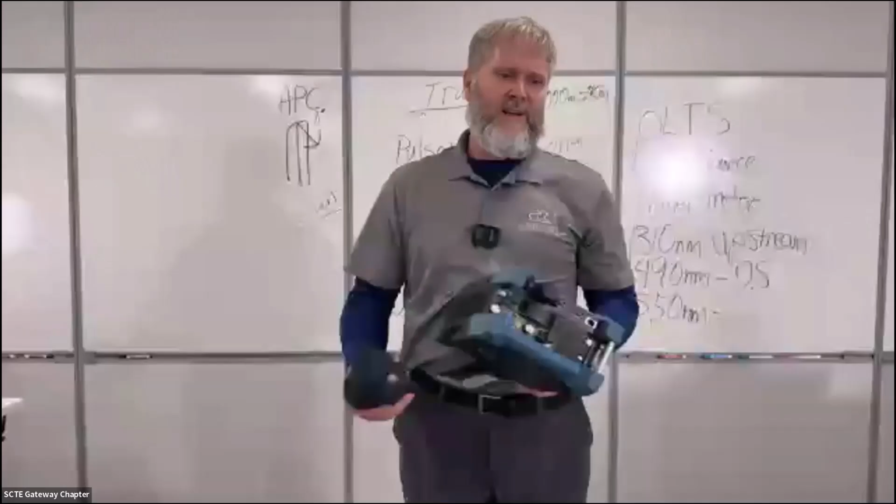There are other colors, by the way, so don't anyone call me out and say, well, there's different colors. I've seen gray, I've seen slate, I've seen tan, whatever. I know that. I totally understand that. But in the fiber to the home world that you're used to, you're using blue connections because blue with a yellow cable or green with a yellow cable indicates single mode. Okay.

So what we were showing here was actually what these connections look like. So I kind of got a little sidetracked. So we'll come back to this now and let's finish this up. Now,

Oh, wrong one. I'm on it. Thank you, brother. Very good. Thank you.

All right. So now I want to get a little granular. What I want to do is we'll change the settings one more time. And that might be the last settings change we make because we could go all day long. I could do all kinds of stuff to this machine and make changes to it, and it would look different every time. Which brings me to a statement that I've had a lot of students say. Well, it looks like to me you can just change the settings to make the OTDR look however you want. That's inaccurate. You actually have to know how to set it properly to get accurate information from your network.

Now, can I fake this? Yeah, some people are dumb, unintelligent and don't know how to read traces. And I can probably do things to make it appear to look good. But me as an engineer and you guys as engineers, because that's what you're going for, that's what you need to be. You need to understand the technology you're working with.

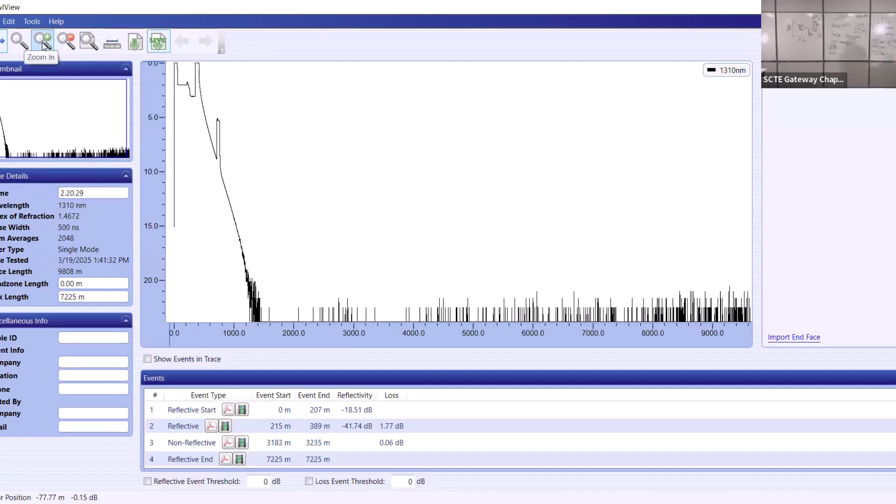Now we're going to mate these two together and watch how this changes. It'll take it a second to catch up. That's fully caught up. Now, I need to go ahead and zoom in just to make this make sense. Why can't I zoom that in? Zoom. Oh, duh. I'm used to another system where you drag your window across there. All right, so here's my APC connection. Just made it.

Now it's got a little dip. It drops, it spikes up, and then it has what's known as a baseline recovery issue. You see what I mean with the baseline recovery? We've got our spike right here. The APC looks fairly good. The connection's good, but then it just drops straight off like that. Why is that? The connection is damaged or something wrong. The mated pair didn't work well.

Now, I left it in here as a teaching moment, but when I initially made this up, I didn't look at the ends to see that they're different. There's a different shape on them. So that's what that is. Flat top at the very far end, that's just because we're still pushing too much energy. And then we see something out here at the very end that's about twice the distance away from the end. That's a ghost. That's multiple reflections on short lengths of cable.

How could you minimize a ghost? Well, we need to either close down the light to this or we need to connect it into a receive cable. So you need to be able to spot those as well. I will say this connection right here, that's similar to what you could see if you saw a bad fusion splice, possibly. Well, it shouldn't look that bad. A fusion will just drop off, but you can see them look similar to that. Okay.

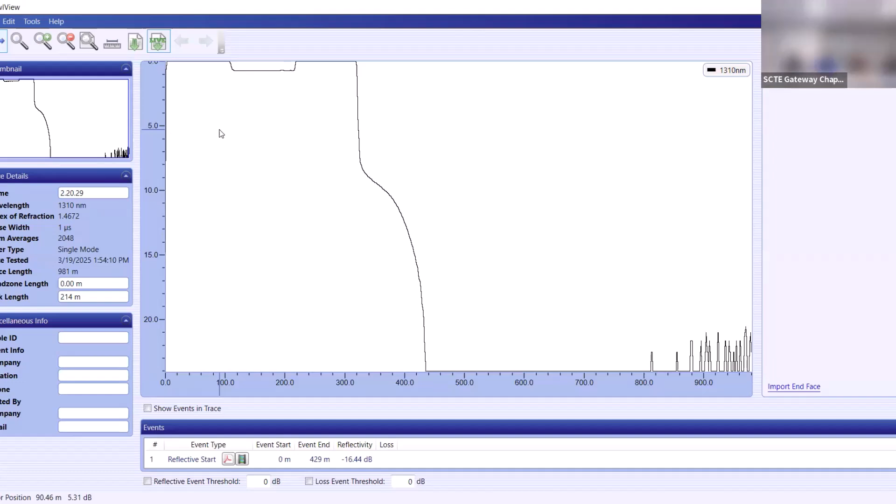So I won't be able to see it. I'll try one more time, and then we'll give it a shot. This will be the last one. Yeah, see, it's still not going to see it. It does not determine basically what it does. I mean, it sees the first connection, then it's got that low baseline recovery thing.

But the way that this works is when you're shooting downstream, then it should see all the little steps as it's dropping off the light. But in this device's mind, in the OTDR's mind, it's going to one single fiber, and then it's just going to one single fiber. So it doesn't really know which one it's connected to.

We could probably put on here. I'll tell you what we'll do. This will be fun. I've never tried this, so let's see what it does, but I guarantee we'll probably see a little change in the light because then we're going to continue out of one of these splitters and go into another one. Yep, there it is.

So now we've continued through one of the splitters. We're broadcasting through a complete 1x32. Now we've gone into a launch cable so we can see past that. So here, fun fact, we'll go do this. And I'll change this setting and we might actually be able to see now. But considering that it's passive, it's taking all the light through one individual location and sending it out 32 ways. So to it, it was just one.

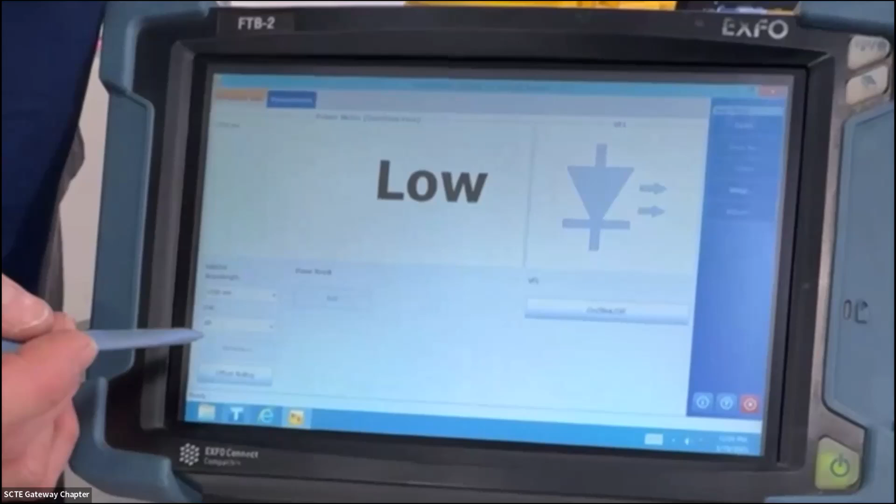Okay. Now, right now, I can actually send different signals. I can do the VFL to actually send light. And then I can come in here and I can set this to do different wavelengths. And I hope this does what I wanted it to do, because oh wow, it's not going to do it. Okay, I do apologize about that. So that is my VFL. Bear with me as I see if I can find this setting.

All right. Tools, I don't think that's it. Let's see. Utilities, that's not going to be it. I'm going to look in one more place, and if I can't find it, I'm not going to worry. Oh, I tell you what, I actually brought a backup. Always have a backup for a backup. I never do anything without a backup plan. Never leave home without a backup plan.

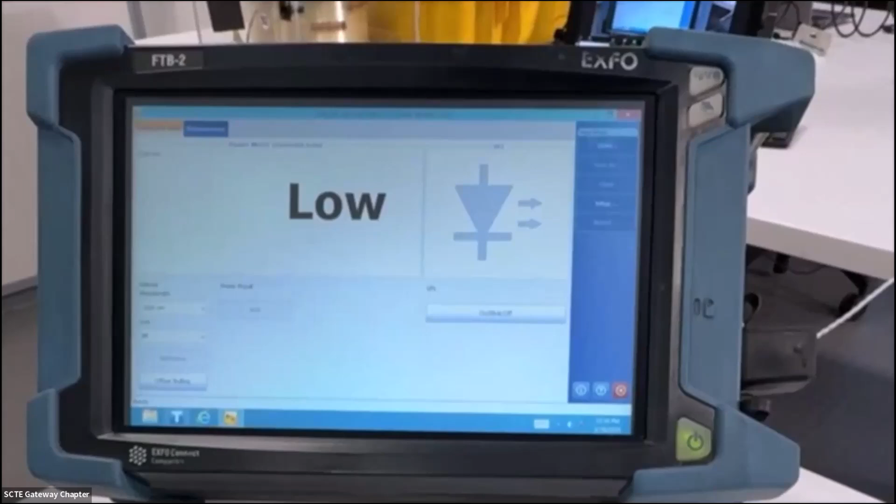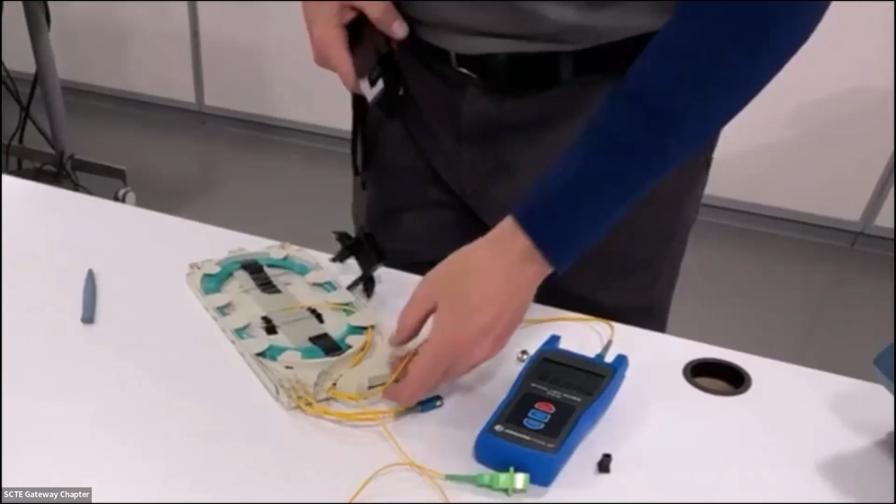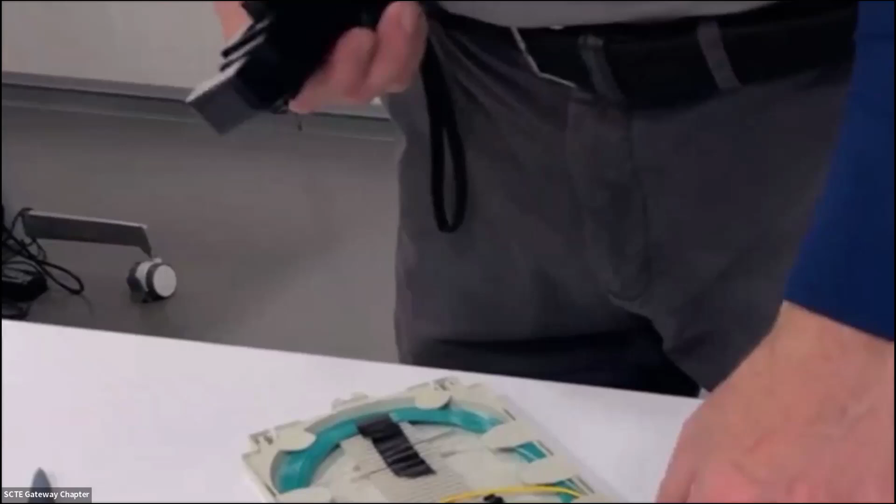This is a light source. This source is going to generate 1550 nanometer wavelength. It's going to send a 2 kilohertz tone out. This is about to give me this audible tone that I thought I could do over here. Now, a lot of times they don't let you know that some of these jackets you cannot see through. All right, here's the deal. What I'm getting at is the light doesn't actually get through the jacket due to the color of the jacket. Also, these are known as bend-insensitive fiber.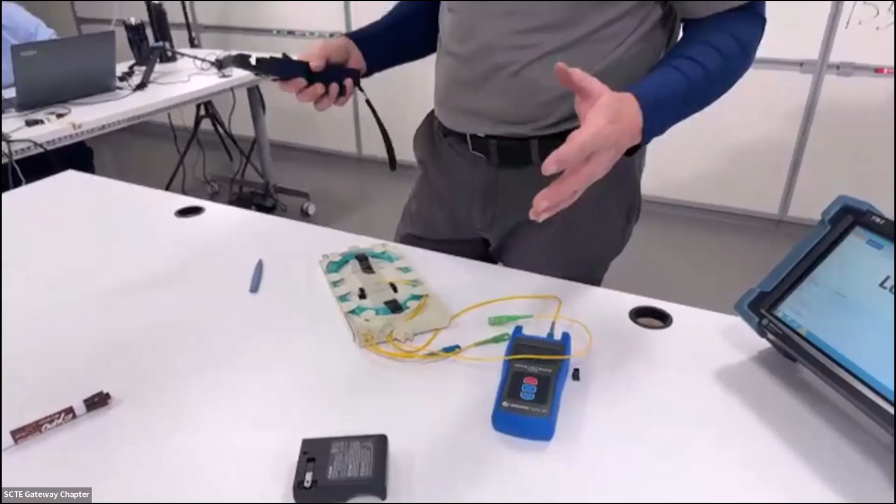Now, if you didn't know this, bend-insensitive fiber is used in fiber to the home all day long. It's every cable that we currently use. It's patch cords and it's aerial. It's known as G.657. It's a brand new cable. When I say brand new, I mean 10 years maybe or more. All right.

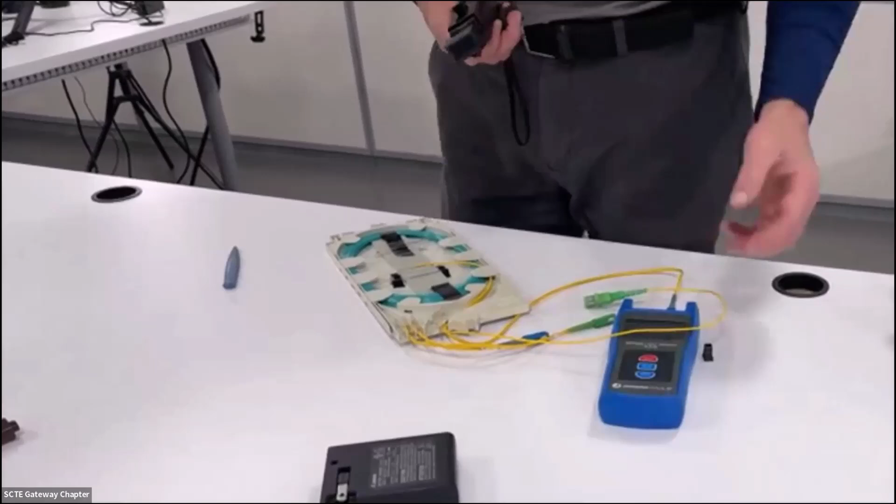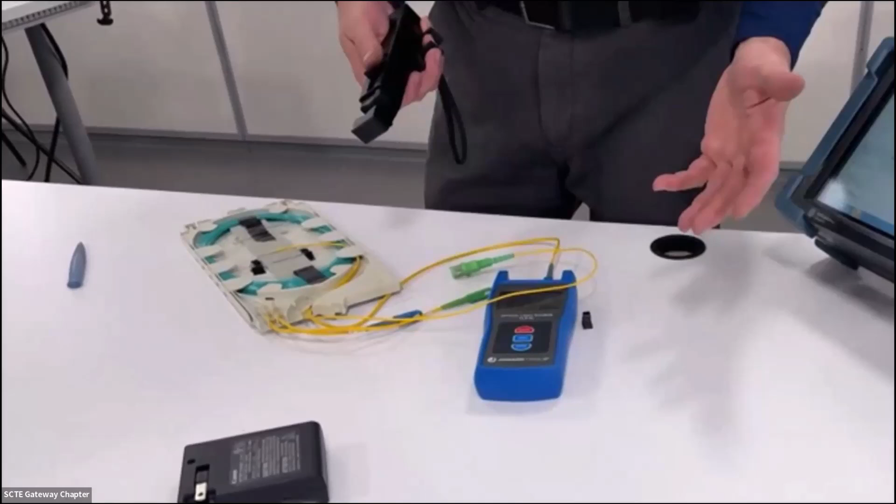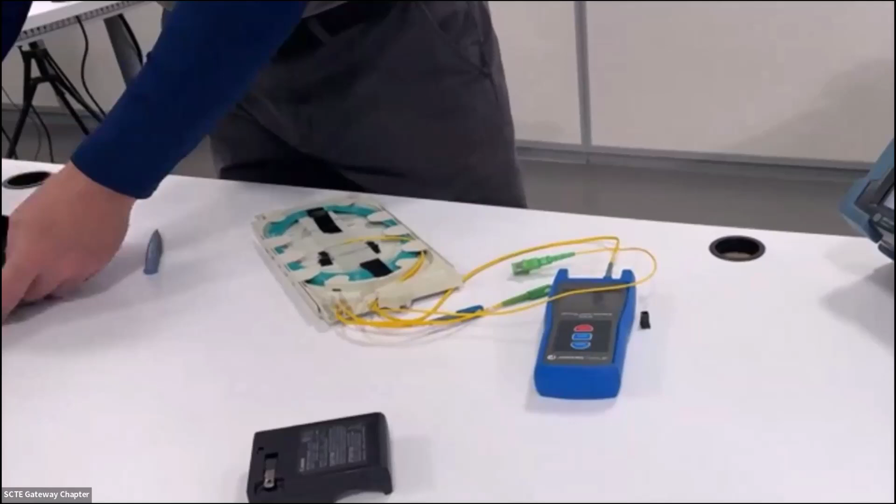The way that it works is it compensates for any micro bends that you put in the fiber. So if I do actually try to check and identify a tone coming out of this, it might compensate for the loss that I've put in this cable whenever I put this on here, and I might not actually detect a tone. Okay. So don't shout me down if it didn't work, but it should see through this jacket. Now it'll see through all 250 micron fibers. We've proven that no matter what the color is.

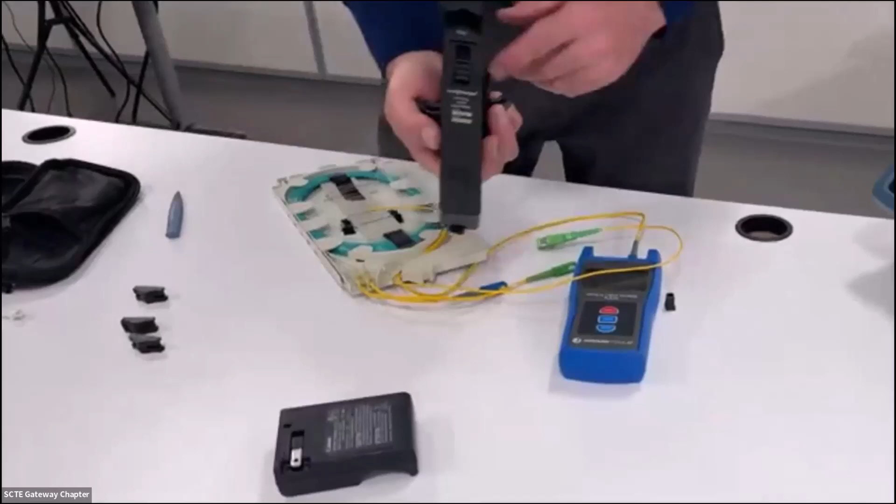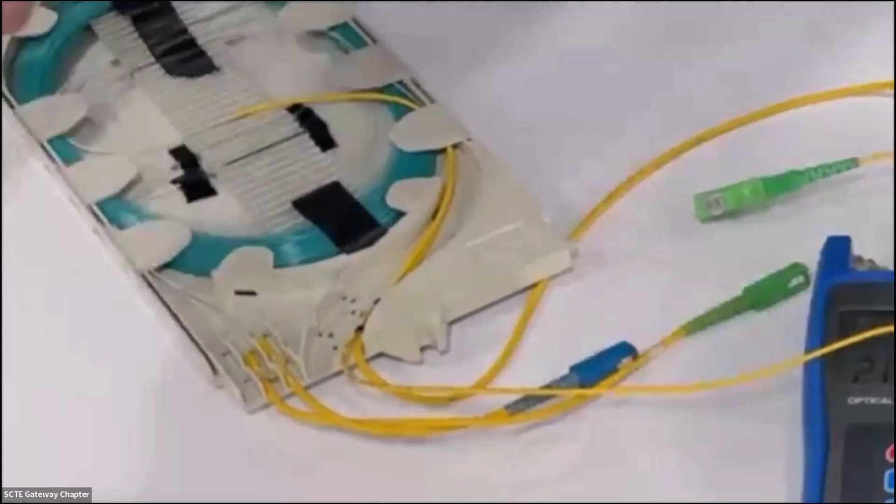On your fiber identifier, which works hand in hand with the OTDR. That's why I wanted to show it. This is my OTDR's best friend. All right. I can actually change the heads on these and change the different types of cable that I'm going to test.

And then I put this on here and I press up and I kink it. And it beeps. And then it tells me direction of the signal. And it'll actually tell me it's a 2 kilohertz tone. If I come in here and I change this, I can actually change my wavelength. I can come in and change this. So now I'm not sending tone at all. Now I'm going to send a really short tone.

I'm going to send a 270 hertz, then a 1 kilohertz, and then a 2 kilohertz. And it allows me to identify the fiber. It's very handy. It's your best friend. Now, you've used it to identify if the fiber is just live. And that's awesome. But it is suggested that you use it to actually identify tone.

So very handy. This machine should have done that. I don't know why it doesn't. I haven't played with this enough. I only played with this last night for a couple of hours. But normally they all have that. Okay. So that's a very handy tool.

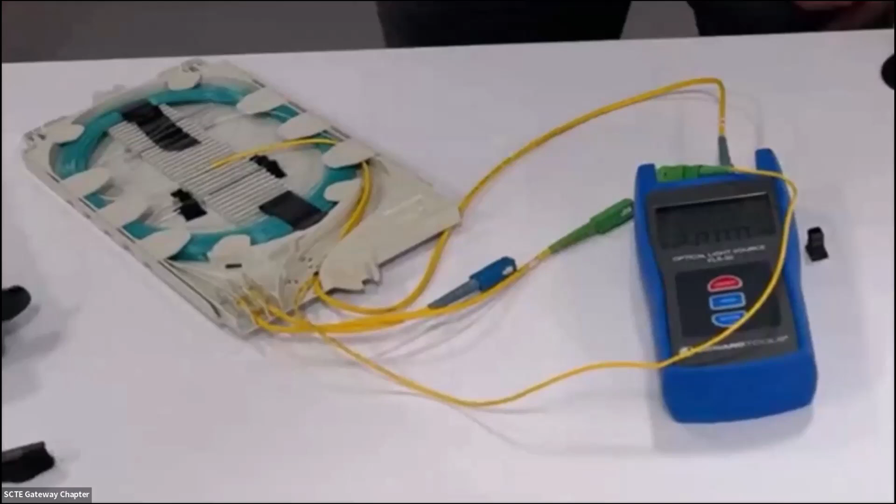If it doesn't see through the jacket, that's just because the way that the fiber is designed, it's actually designed to compensate against you actually inserting loss in the fiber by kinking the fiber. So that's the last little tool that we like to work with in conjunction with the OTDR.

And then finally, the very first thing that I ever use, no matter what I ever do, where I start personally is the VFL. I don't do anything until I start with red light. Now, if I were teaching this class the way that I normally teach it, then my opinion is I start with red light and I trace from that point forward. But look, I understand in the world of production that sometimes it's more advantageous for you to go out and shoot with the OTDR as soon as possible.

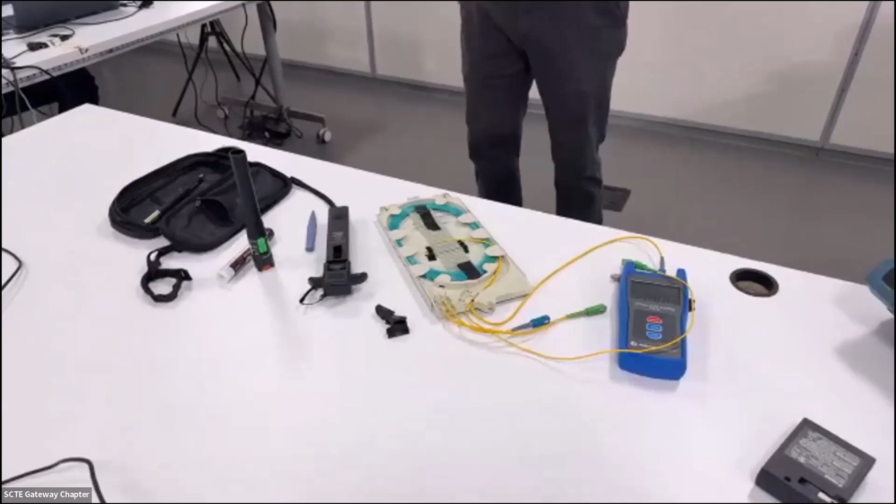So between those few items right there, and I do always carry a good light source to test with. I'm not going to make anyone do that. That's just me personally. I do that because we've had several issues in the field where our light sources had issues, and I just carry one out, a known good light source, so I can check my equipment against a reference, basically.

So I'll give you another real world example. We pulled a brand new patch cord right out of the box, the amphenol cables, the OptiTap ones, you know, the black ones that you screw in, they're APC connections. We pulled a brand new one straight out of the box, just used it one time and started to test. We went to set our reference. We couldn't set a reference.

Well, to make a long story short, if we had started with the VFL, we could have sent red light across. We would have determined that there was actually a break in that cord, and then we would have not wasted our time. So I always start with the VFL very first.

All right, that's about all that I have, at least at this point. There's some more that we could discuss. It's at a good breaking point. I don't know what our time is, by the way. Yeah, so

I did not bring in a book that I wanted to, but I felt like it'd be silly to promote someone's material. But there's some really good reading on OTDR. My opinion is you need to look up a couple of reference guides and study the functionality of the OTDR. You really should. There's so much more that we could have gotten into.